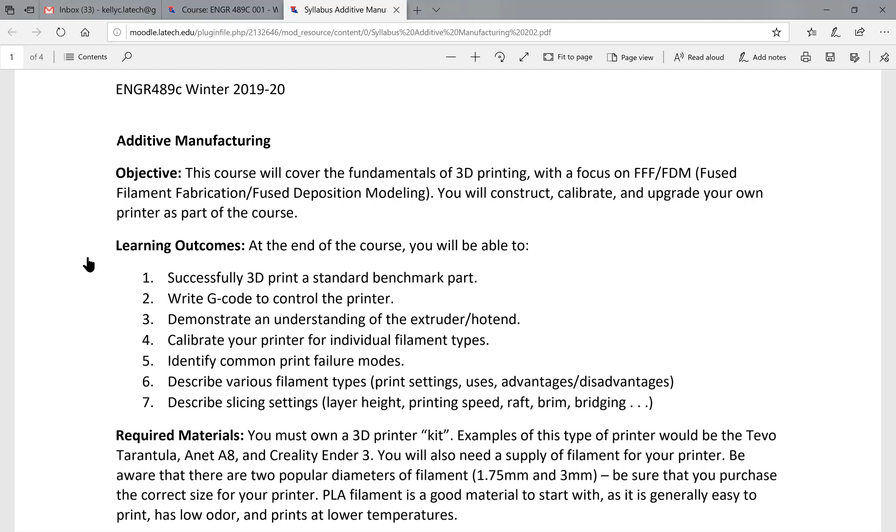And then at the end, there is either a second quiz, or you can just print 3 more things out of the option of stuff to do, and that can count as the last quiz.

You do need to have access to some kind of printer. You don't have to bring it to class. I'm going to bring mine, this one, or actually I'll leave this one here. I'm not going to tote it back and forth, but you can bring them to class if you want to.

There are cabinets over here that you can store them in for some amount of time, although a lot of them have locks on them, so I guess you can't use that. We'll use that very first one. You don't need to bring them, so unless you have a problem that we need to look at and try to fix, you don't need to bring them to class.

Most of the time, anything you print is going to take a minimum of 20 minutes and way on up from there. So most of the time, having you print something in class isn't going to be a really viable option. But there's a couple of days.

We'll do one day right before the Christmas break that is bring-your-printer-to-class-if-it-has-problems day, so we can make sure it's printing before you leave for wherever you go for Christmas break. But other than that, even then you don't have to bring it, it's just an option. I'll bring this one or keep this one here.

But you do need to have one, because most of the assignments, like 80% of them, require that you printed something. So you have to either have someone who will let you use their printer all the time, or have one of your own.

This one I have, the little Tarantula Pro, is a decent size one. It's not the smallest one you can get, it's certainly not the biggest one you can get, and it's not terribly expensive. There are plenty of these kits that are in the textbook price, the expensive engineering textbook price range, so you can certainly find one out there that will work fine. Actually, this one works pretty well. I've only printed with it once, though, so we'll see how it holds up.

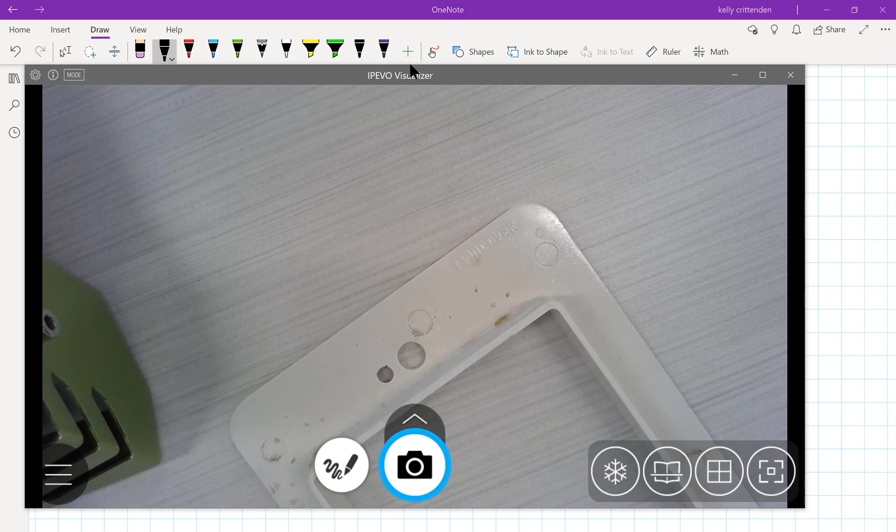That means this thing was injection molded. That's one sign it was injection molded: it's got these little ejector pin marks where the part was ejected from the mold it was in. A lot of things, particularly the cheaper plastic stuff, were made with injection molding. So a lot of stuff is injection molded.

Let's see, what else did I have on here? iPad keeps going off.

So we're talking about additive manufacturing. There's also subtractive manufacturing—milling and lathe operations and things like that, where you start with a block of stuff and cut off all the stuff you don't want. That's subtractive manufacturing, and there's a lot of different ways to do that.

Then there's forming. The really cheap plastic stuff, like a blister pack that an SD card came in, is vacuum formed—you take a sheet of plastic, heat it up, and suck it down over some form. You can also form metals: stamp metal, press metal, that kind of stuff. So there's forming in general.

Joining—you might weld stuff together. And casting, you've actually done some casting. If you've done 321, which I assume everybody has, you've done casting and subtractive in that class. And certainly you've joined things—you may not have welded something, but you've bolted or screwed something together.

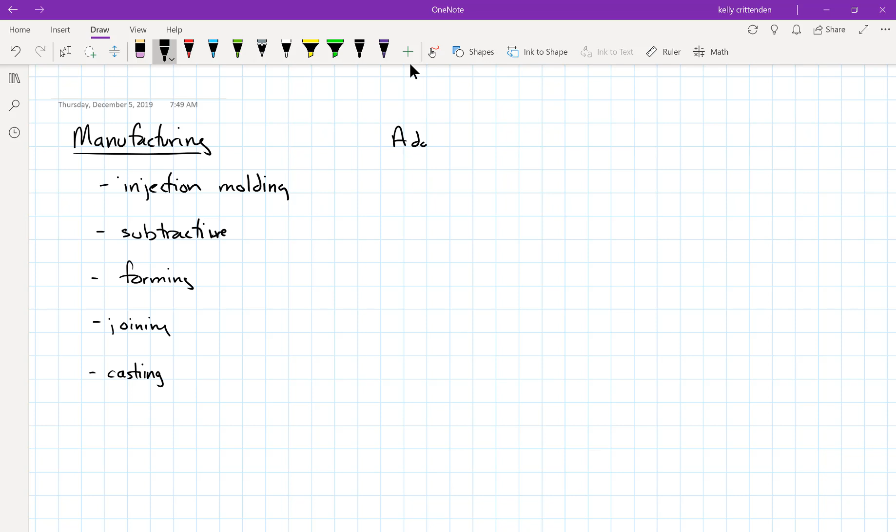You may not have done forming or injection molding, but you at least know what they are. So those are most of your traditional manufacturing processes. And then we're over here in this new thing. I say it's new, but it's actually probably older than you think.

The first 3D printers were around in the 80s. There were SLA machines with a vat of liquid resin, using a laser to cure it in selective spots—those were around in the 80s. And people have used this idea plenty; the pyramids are basically really giant versions of additive manufacturing, where you stack things on top of things. So it's not that it's very new.

What's new is that in the 80s, the companies that owned those patents patented everything, and it was never actually manufacturing—it's still not really manufacturing. Although there are places where it's getting closer to manufacturing, it's still mostly prototyping or really short-run type things.

So making hundreds of things maybe at the high end, whereas manufacturing is usually thousands or tens of thousands of things. It's not that you see these little 3D printers on an assembly line anywhere really yet, although there are some companies with models similar to that, where you have print farms that print parts for other printers or for the automotive industry.

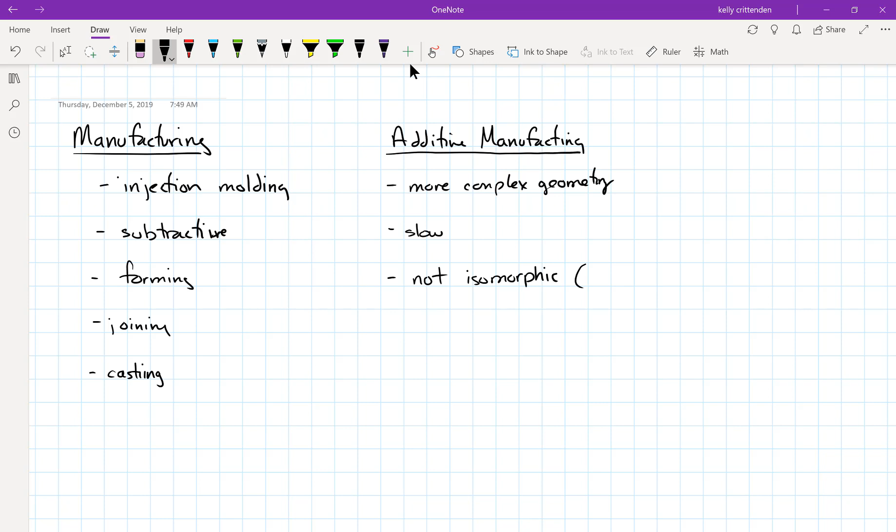Sometimes they are, not always isomorphic. Particularly with this style, the printers that we're going to use in this class are much stronger in one direction than another direction because of the way they're made. The resins, the ones that use lasers and UV light and that sort of thing, they're generally pretty isomorphic, so they're equally strong in all directions.

But some of the other processes, particularly the cheaper ones, are not. They have grain to them that makes them sort of like wood, where they're strong one way and not another. So we're kind of over here in this additive manufacturing arena.

We're not going to get into the manufacturing side of things, although you can relatively easily open up a little Etsy store and sell something, vases or whatever. We could probably go on Etsy right now and look for vases, and there's maybe 40 different ones to choose from, just 3D printed vases, because you can make really complex geometry. You can make interesting looking things that you couldn't normally make, and you can do it relatively quickly.

So a vase the size of this might take you 2 hours to print, maybe something like that. It's not terrible because it's not solid, it's just a bunch of walls. So you can make some money doing it, but most things right now are not manufactured using this.

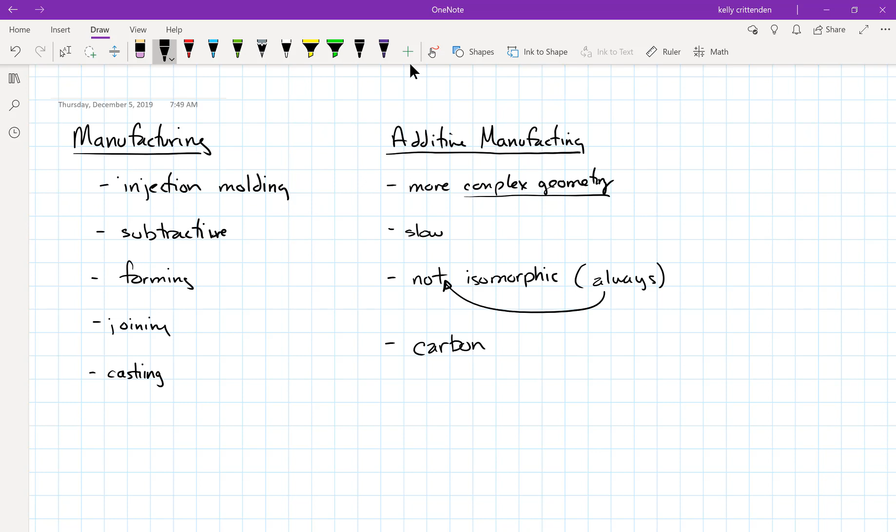So that's what's new about additive manufacturing, I don't know that these are called FDM printers. So let's talk about the general types of additive manufacturing, even though we're not really manufacturing things right now on a large scale.

There are ones that are based around some kind of liquid, like an SLA. These were the first printers that were commercially available, these SLA resin printers. You had this vat of polymer, and you shined a laser on the polymer in certain patterns, and it made prints. That technology hasn't really changed much at all, other than they've built different resins. There's much more blends of resins now, but it's still very similar to the way it used to be even in the 80s. And these can produce really highly detailed models.

I remember the first one I saw was in Memphis in '95 or so, at an orthopedics company. They had one of these just to make prototypes, like images of bones from CT scans. They could 3D print the bone and then build some kind of orthopedic device around it. They had printed this little tree, and it had all the leaves and branches and everything, and that was in the mid 90s.

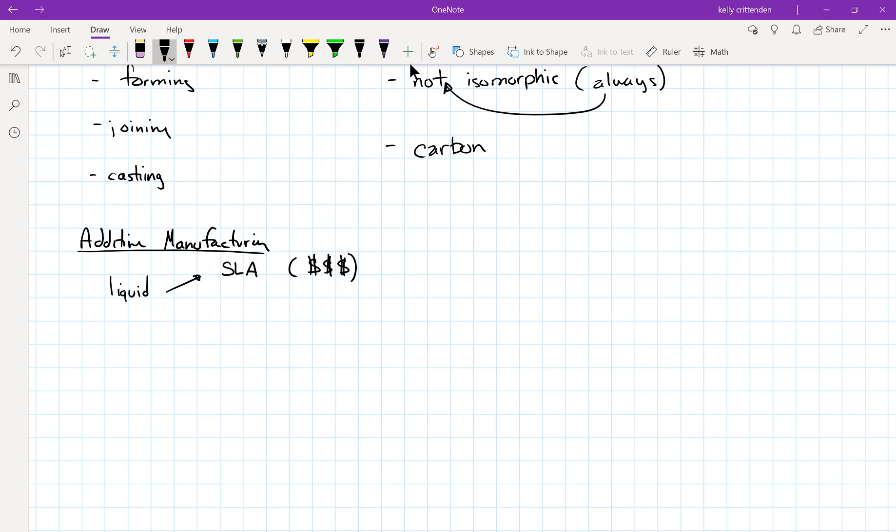But recently, people said, hey, resin doesn't just cure with lasers, you can also cure it with UV light. So they took basically cell phone screens, shined UV light through them, and used the cell phone screen as a mask, so you can make the screen whatever pattern you want. And they have these now that you can get for $300-400 that cure with UV light, so they're on the cheap side. This one up here is like $200K or so for a good one.

Now there's this in between that's in the 5,000 to 7,000 range that still uses a laser to cure resin, like the Objet printer, I think. There's one kind of in the middle called the Formlabs printer, they have different versions, Form 1 and 2 and all that kind of stuff. It's kind of in the, I don't know, maybe 6,000 range.

These little guys down here, maybe I'll just put a dollar sign on this one. A good one is like the Photon, and it's $400, I think, probably. You can probably find it for $400.

And all of them are able to print pretty high detail, so you might get layer heights in the 0.05 millimeter range or less. Really, the layers start to vanish at that point. This thing, a lot of times I'm printing at 0.2 millimeters or 0.3 millimeters if I want to go fast, and that looks decent.

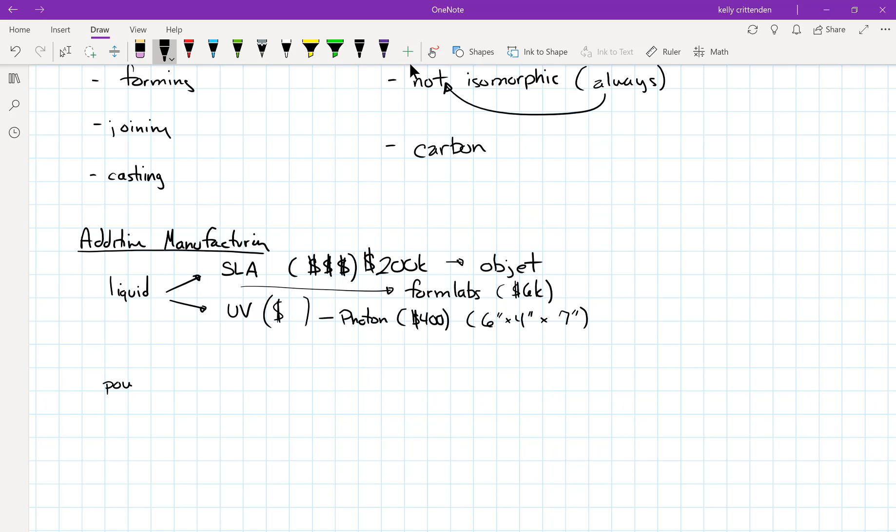You have another set that is based around some kind of powder, and these fall into a category called binder jet. The first one I saw of these used inkjet printer cartridges. You'd take an inkjet printer cartridge, and it would have 4 or maybe 5 cartridges - one was basically a glue, a binder that held the powder together, and the others were color. So you could actually print in full color, and they are able to print full color.

Basically, it had a layer of powder, and you bound part of it together in whatever color you wanted, then scraped a new layer on top. The machine did all this, you didn't do it. It built this up layer by layer, just like any of these others. Then when it was done, you dug it out of the powder and infused it with super glue, more or less - though there are other things you can infuse it with to make it flexible or whatever. The idea was that you temporarily glued it together with this binder on an inkjet printer type cartridge, and then finished it later.

They're kind of weak, these resin parts. This carbon printer here is one of these resin printers with a little bit of special technology to make it faster. The parts that do show up in additive manufacturing a lot of times are in that resin category. The powder ones are just prototypes - they're not really going to be usable parts. They're kind of fragile, better now than they used to be, but still fragile.

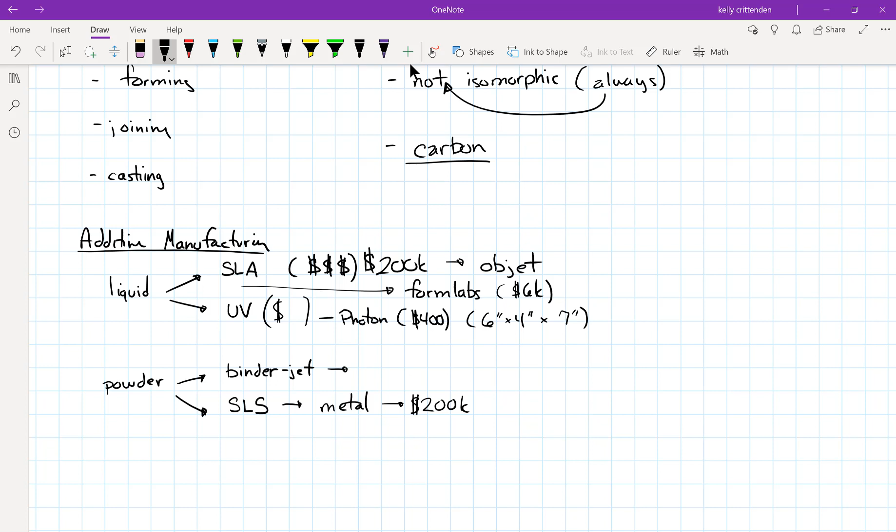What we're doing kind of revolves around plastic. So we're over here, and this is FDM, fused deposition modeling. The patents on these early FDM style printers from Stratasys, who owned most of them, ran out, but their trademarks didn't, and FDM is actually one of their trademarks.

So a lot of times you'll see people use FFF to mean this. Let me write it down - fused filament fabrication. It's the same thing, but FDM is trademarked, so sometimes people get in trouble for using FDM. That's why you'll see FFF instead.

These fall into all sorts of plastics. You can print in nylon, you can print in PLA, or this one - I don't know what this is, it says it prints like PLA. Oh, it's biofila. I don't know what that is, but it prints like PLA. ABS is the material like your car bumpers are made of. You can print in PETG, which is somewhere between PLA and ABS, but not as noxious smelling as ABS. There's also filament that is the base filament with stuff embedded in it.

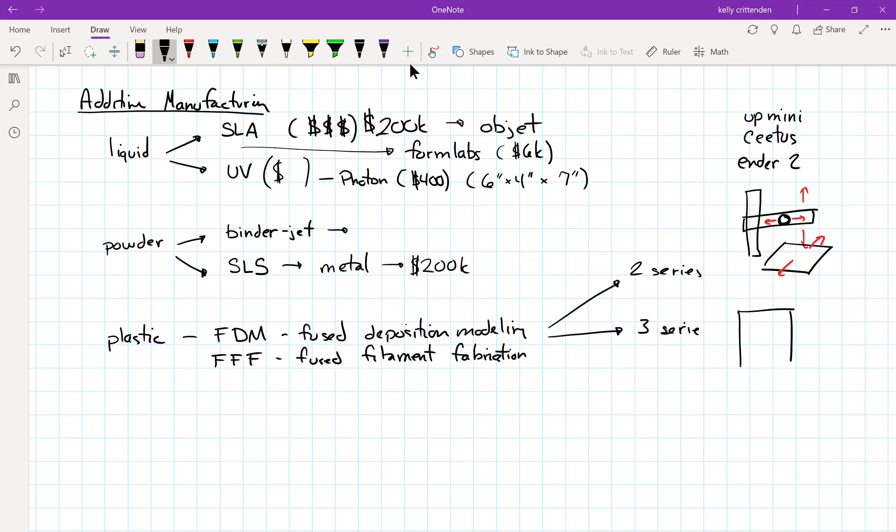And then in the 3 series, you've got like this Tevo here, where you've got 2 upright pieces, so you've got a whole gantry. Maybe they're connected at the top — most of the time they are, though there might be some really cheap printers that aren't connected across the top. But you have this gantry, and you've got your axis across here with the hot end on it, and the axis can move up and down, and the hot end can move across, and then you've got the bed again that moves frontwards and backwards.

All these where the bed moves have the disadvantage that the bed is relatively heavy, and if you want to print quickly, you've got to deal with the fact that this bed has inertia and you have to move it back and forth really quickly. So it limits how fast you can print a lot of times because of the massiveness of the bed, having to accelerate and decelerate and change directions back and forth all the time. The print head itself is not as heavy, but it can also suffer from that.

And there are things you can do about that. One thing is, a printer like this one would be the Tevo, Ender 3, Creality CR10 — however you spell that, CR10 — those are that type of printer. Some people said, well, let's not move the bed, and so they built what we're going to call these Core XY. Ender actually calls it the Ender 5, I think.

And what they did is they built a box, so you have 4 uprights, and the bed is in here, but instead of moving up and back and forth, the bed moves up and down. So when you're moving up and down, you don't have to move very quickly because you're only moving maybe 0.2 millimeters, 0.1 millimeter, something like that. So it's moving pretty slowly, and it's just one step at a time, more or less, so you don't have that inertia.

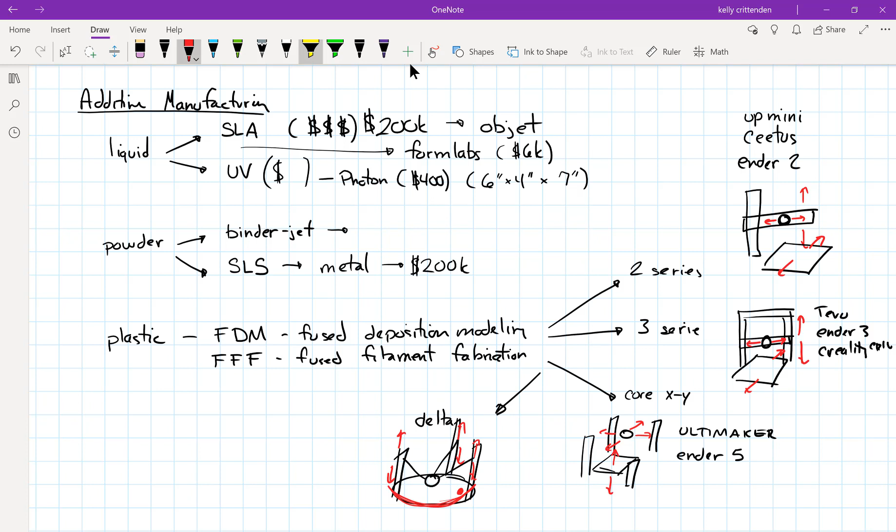Most of you are going to have one of these guys—that's probably what you're going to deal with. The Ender 5, you might have that. It's relatively affordable. The Ultimaker is kind of expensive, $2,000 or whatever. But all the Deltas, you can get a little Delta printer. I would not get a Delta printer for this class unless that's just what you already have.

Just because some of the stuff that we would like to do isn't as obvious how to do it on the Delta printer. So unless you already have that, I wouldn't get one of those for the class, although they're kind of fun to print with. You might have one of these little Ender 2 style printers. They're not necessarily much cheaper than the 3 series printers—they might be a little bit cheaper. They're smaller though, so if you don't have a lot of space, then they're kind of nice for that.

And then there's all these other things—some really weird stuff out there. Like there was a printer that basically took a roll of paper and cut out every layer. It would cut out one layer, then cut out another layer, and put these little index holes in them, and you glued all these layers together—or more recently the printer itself glued them all together. It would be full color, everything, but your part would just be like stacks of paper glued together.

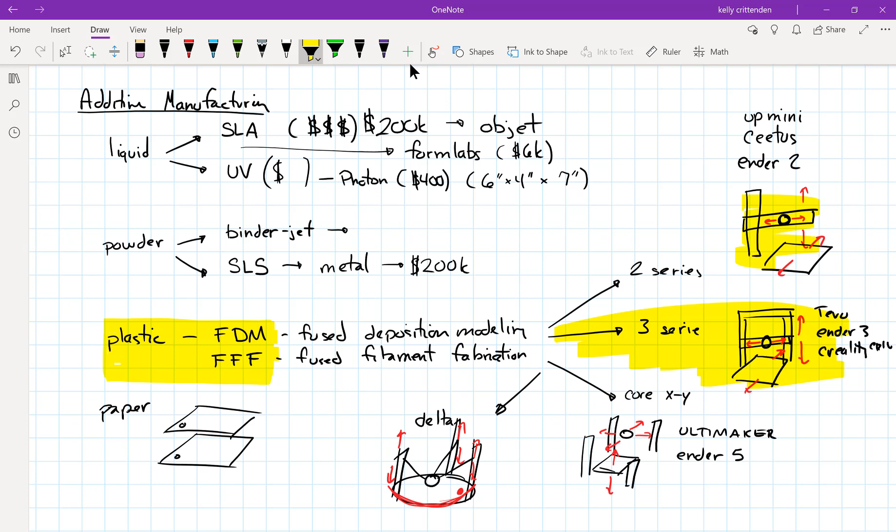So when you're looking at your printer—let's see, yeah, I think maybe we'll try to print something. I haven't printed with this printer in a while, so we may not be successful. We'll see.

You generally have like 4 pieces of it that matter, and then everything else is either an upgrade or a better version of the thing, or you added on something to make something simpler. But you got to have some surface.

When you see them with this foil on the bottom, a little thicker, what that generally means is this is a heated surface. PLA, you don't have to have a heated bed to print, but other materials, you might have to have one of these heated beds. So some of your printers, like this Cetus, it does not by default come with a heated bed, it's an optional thing. So if your printer does not have a heated bed, you're going to be limited on the materials you can print. But one of the materials you can print is PLA, which is the one I recommend you print anyway. So you have to have some kind of bed.

Sometimes the beds you get, like this one's a relatively thick piece of aluminum. I haven't actually tested it to see how flat it is, but they might not be flat, and that makes it a little bit difficult to print. One thing you can do is just go to Walmart and get a little mirror and put it on top. The mirror is pretty flat, or just a piece of glass, doesn't even have to be a mirror. The mirror is nice if you have a heated bed, because the backside is coated with silver of some kind, so it conducts heat better. But it doesn't have to be a mirror. It can be a piece of glass whether or not you have a heated bed. It's fine, but that is generally flat and will kind of level out whatever unevenness there is.

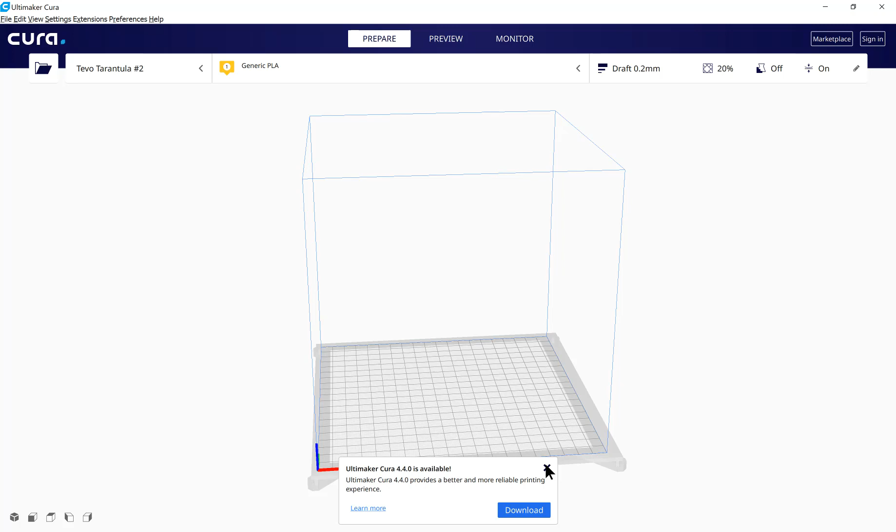So if this was the first time I did this, it wouldn't know what printer I want to set this up for. Some printers are bigger and smaller, and they use different systems of moving around. So the very first time, you do have to set up a printer.

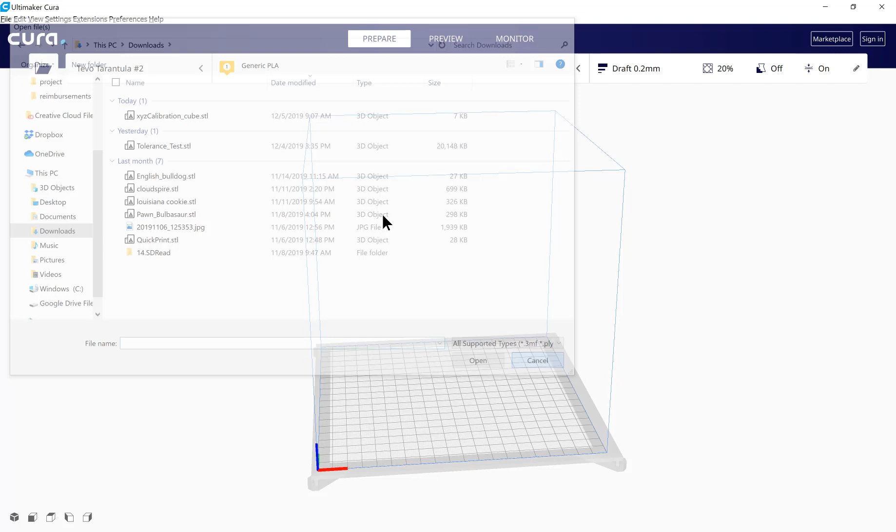So if I were doing that, let's see. Oh no, that's if I want to load something, I don't want to do that, that's to load a file. I think right here, you wouldn't have anything named, maybe it starts out with Ultimaker. They keep changing these menus where everything's at. This is the 4.3 version. Apparently you'll download the 4.4 version, which probably looks similar.

You go up here and add a printer, and they have, oh wow, that's all cluttered up. You probably aren't going to have a networked printer, so you don't need that. You probably want to add a non-networked printer. Then they have a list of all these different printer types. There's all the Ultimakers, and then you can make anything you want in here.

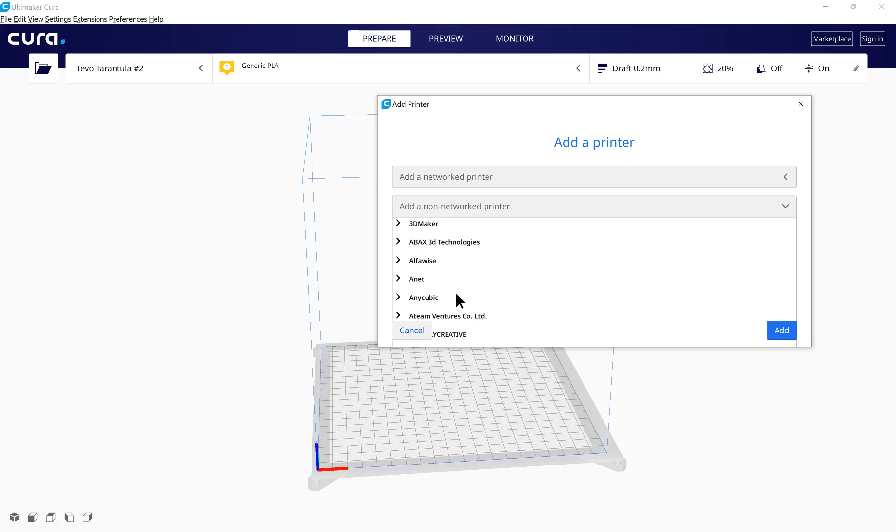And then there's a lot of the different manufacturers. ANET is one of the ones you might have, it's one of the cheaper printers. Let's see, Creality, so all your Ender stuff is probably in there. Yeah, there they went. So all the Enders are in that Creality set of printers, and the CR10 and all that kind of stuff. Tevo's, usually they're in here too. Let's see.

There's a lot of different ones. MakerBot's in here, I doubt any of you have a MakerBot. Monoprice, that's the little one, I think. The Up Mini is the one that, or I guess it's the Select Mini.

Select Mini, okay. Prusa, those are good. I have a Tevo, I can probably type in and search, but I'm just looking through them. SeeMeCNC, those, they produce some of the good Delta printers that I've seen. Tevo, all right, so the Black Widow, that's a really big one. Tarantula is the one that's here, and the Tornado is kind of the medium-sized one. So I would pick Tarantula.

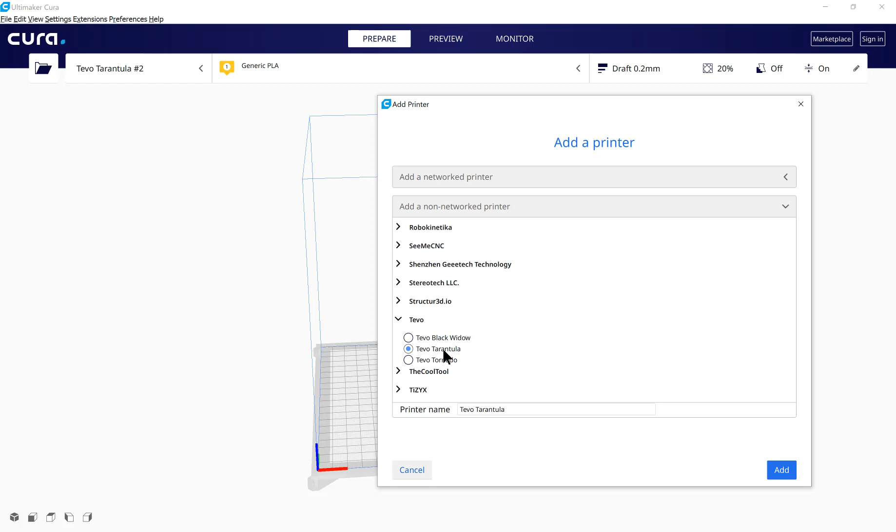What that does is it basically goes in - I've already done it so I don't need to add another one - it adds in the option here that I've got, actually I've got two for some reason. I put in that I want to use whichever one I want to use, and it sets the build volume. So I've got this little view of what size I've got to work with, and this outline of how tall I can make it. Your part has to fit inside that build volume. It'll set things like different extruders need different factors to extrude the right amount of filament, and it'll set all the stuff that it knows to kind of generic, this should work out of the box type settings. And then you go and tune it from there.

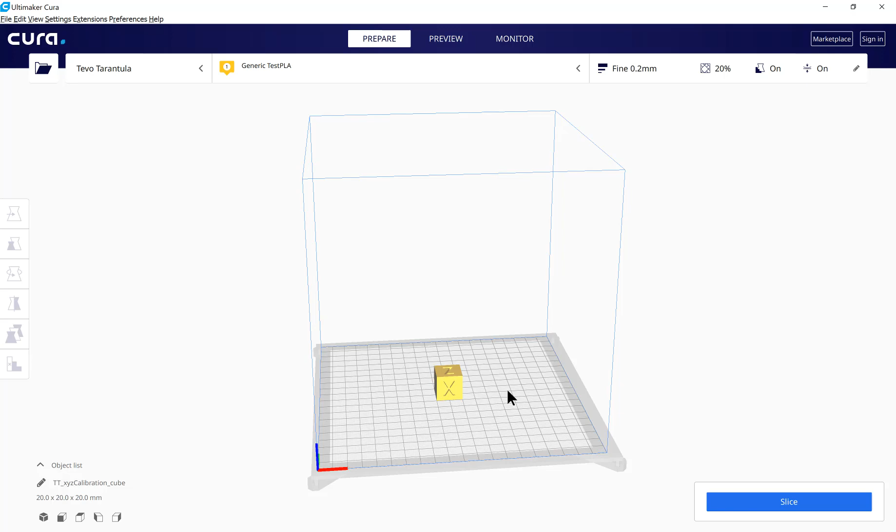We need to get our calibration cube. There it is right there. So we'll open that, and it sits in here. Oh, I can't zoom. Okay. Let me see if this mouse will connect. Yeah, all right. So, there we go.

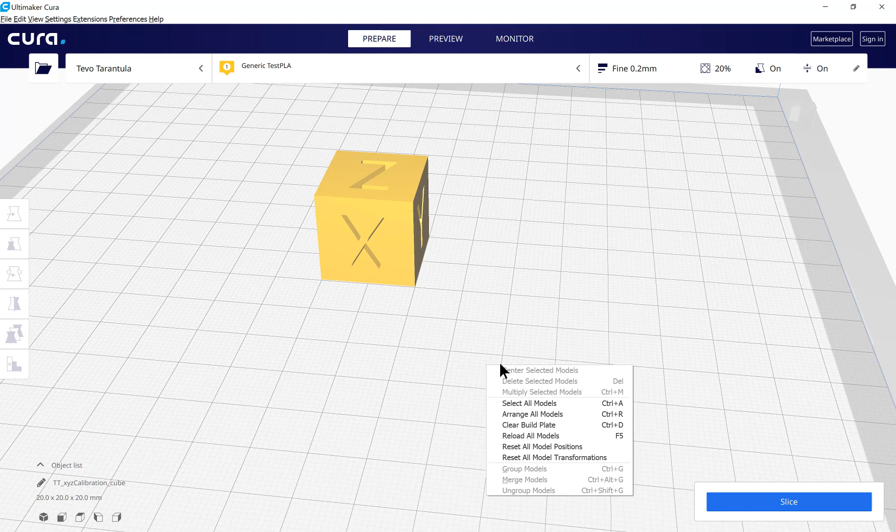So it puts an X, a Y, and a Z on the thing, and those are the axes. Y was printed in the Y direction, and Z was printed in the Z direction. So it kind of lets you orient it, because what you're looking for is to see if the dimensions are correct, but this will help you reorient it if one of them is not correct. It'll show you where you might have a loose belt or something like that, or if there's some features, sometimes there'll be little bumps behind some of these letters, it'll let you know that maybe you were printing too fast in that direction, something like that. So anyway, I get the geometry.

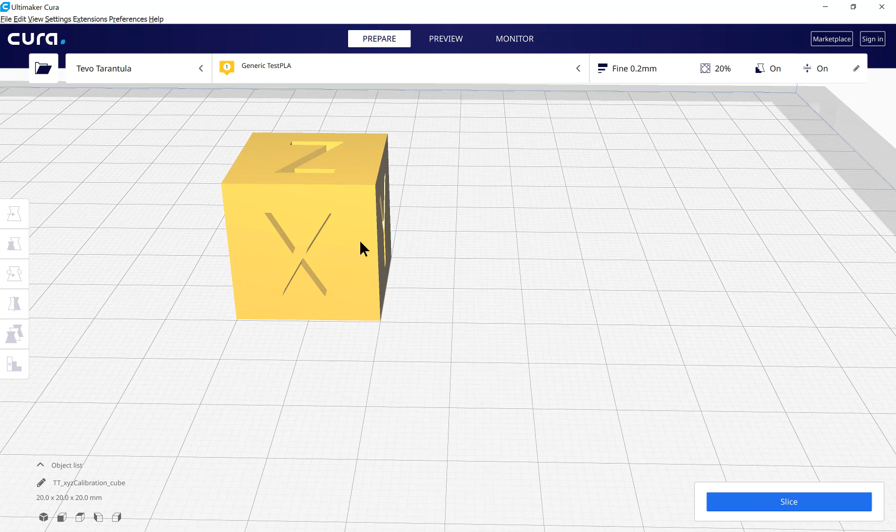This is the STL file, and then I have to set up how I want this to print. Cura, by default, has this really simplified set of settings here, where do I want fine? I don't want fine, I want draft. We'll throw that away. Now, actually, it put draft at 0.2.

So this layer height, there's a whole bunch of stuff, pages and pages and embedded links and drop downs and all this kind of stuff that you can go through and tweak every last little detail. For now, you kind of want to look at this one, layer height, so that's the one they put up here at the top. The layer height is how thick each layer is going to be, and the thicker you make them, then the fewer layers you have to print, so they'll generally print faster.

And there is a limit. So most all of your printers, the nozzle, the little end in here, the hole in the hot end that the filament comes out of, is 0.4 millimeters. So by default, most of yours are going to squirt out filament that's 0.4 millimeters in diameter. In general, you cannot print layers that are more than 75% of that size. So 0.3 millimeters is about as thick of a layer as I can print with a 0.4 millimeter nozzle. I could probably go a little higher, but it's tough, you have to trick it into doing anything more than that.

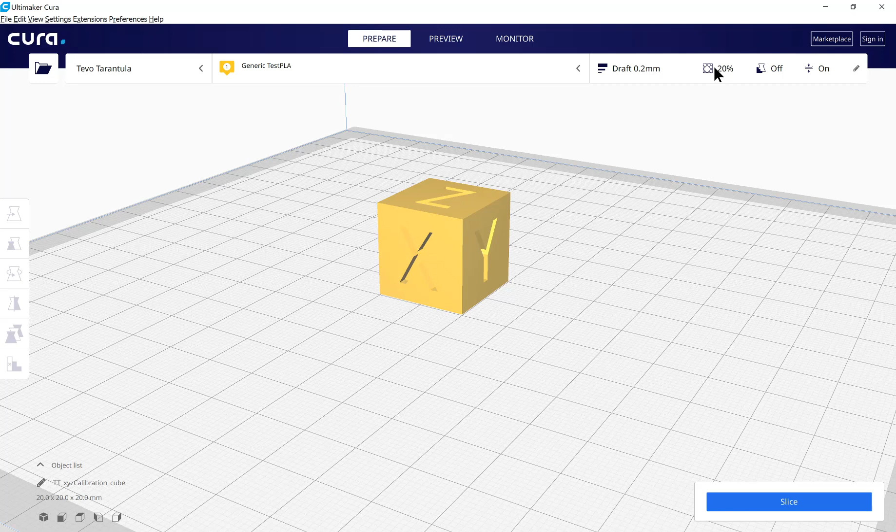This one is talking about how solid do you want it to be. You can print these things with just a shell or some amount of interior, all the way up to solid. 20% is probably a little higher than I want. I'm going to print this at 10%. And then there are other patterns and everything, but I don't worry about that.

This one is support material. One of the advantages of additive manufacturing is the complex geometry, but sometimes you still need to support that geometry. Like if I want to print this phone up in the middle of the air, I can't just start there. I have to have something to hold it up and then print on top of that. So those are supports.

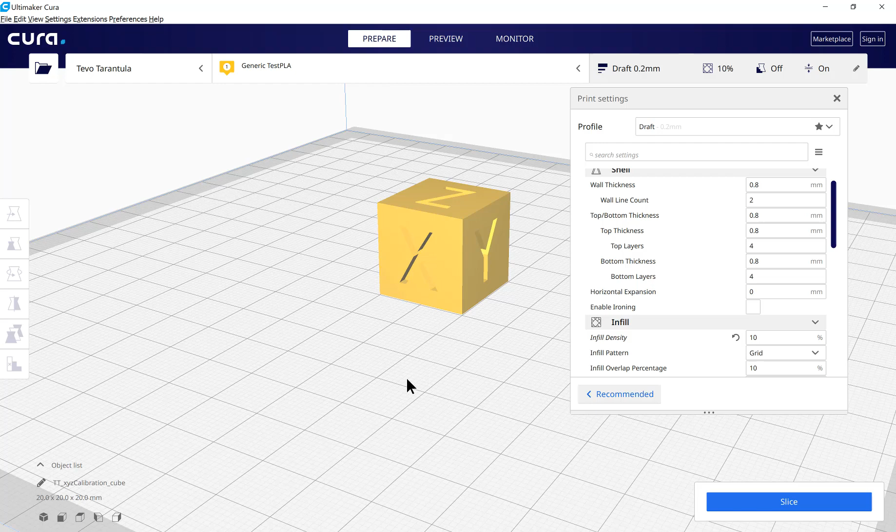I don't need supports for this one. I'm going to print it straight on the surface, and there's nothing that's really overhanging. There kind of is though. If we look really close, like the top of that Y and the X, those are just hanging out in space.

What they're doing is, it even shows them as red. All the red surfaces are overhangs. I don't know if I can make it rotate. There we go, so it's showing that those are unsupported.

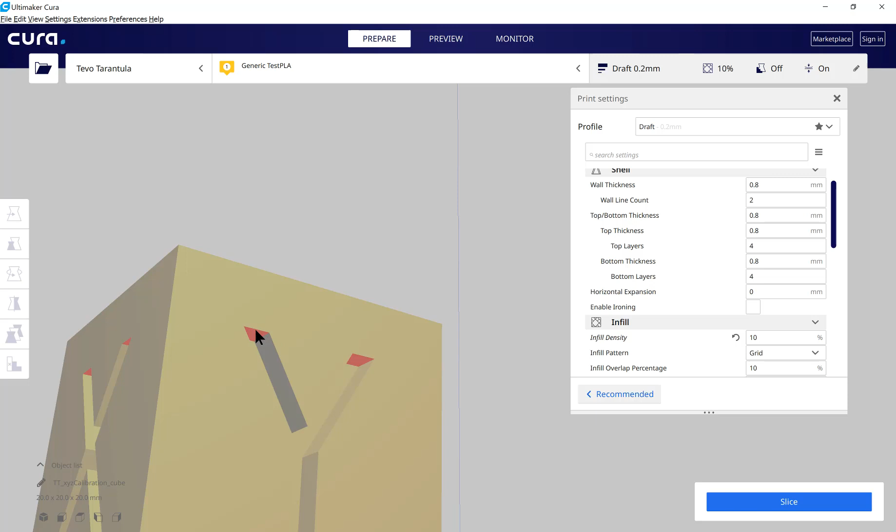But what it's going to do is print over here, and then it's going to bridge across to over here. That's such a tiny little gap that it'll be okay. You can bridge a couple of centimeters probably on most printers without too much trouble, so that's certainly not going to be a problem. So I'm going to leave support off.

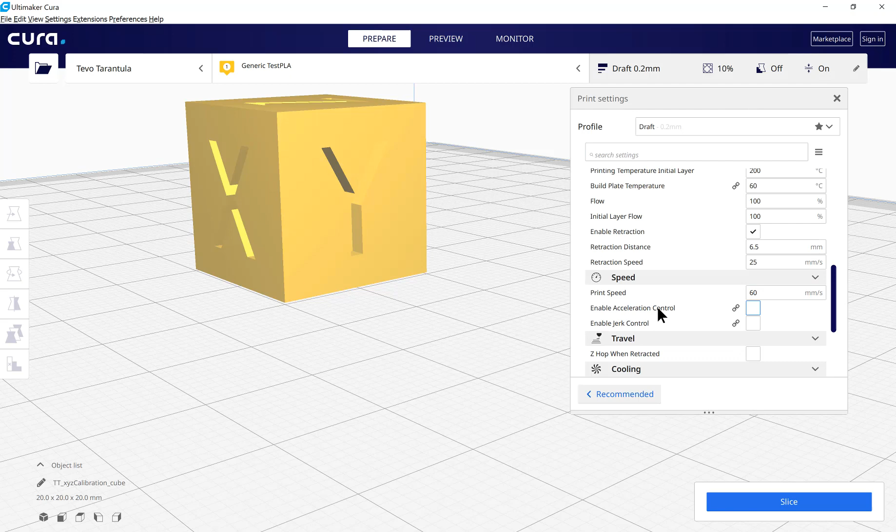This last one is bed adhesion, and it is on. What I've got it set to is probably a brim, so I actually don't want a brim, I want a skirt. There are 4 generic types here. Skirt is going to print basically some outlines just to purge the nozzle and make sure that it's printing.

I usually use that to make sure it's going to work. So I usually use skirt. If I think it's not going to stick very well, it doesn't have a lot of surface area, I'll add a brim to it.

I think I've got these right, we'll check and see. The brim actually attaches to the part, and it basically makes the bottom layer bigger, and you cut off the excess later, but it'll let it stick better. If your print surface is really wavy and everything, you might just print on a raft. What it does is it spends the first time extruding this really heavy material to create a flat surface for you to print on, and then you print on top of that thing.

Or you can just do none. This would probably be fine with none, but I'm going to use skirt, I think that's the one I want. We'll slice it. So then I've got all these set the way I want them. There are many, many more options that we'll talk about later.

This one is printing though, and you slice it. This one doesn't take very long, it says it's going to take 17 minutes to print. It's going to take 3 grams of filament, which I've certainly got here. Or if I want to measure it in length, 1.13 meters.

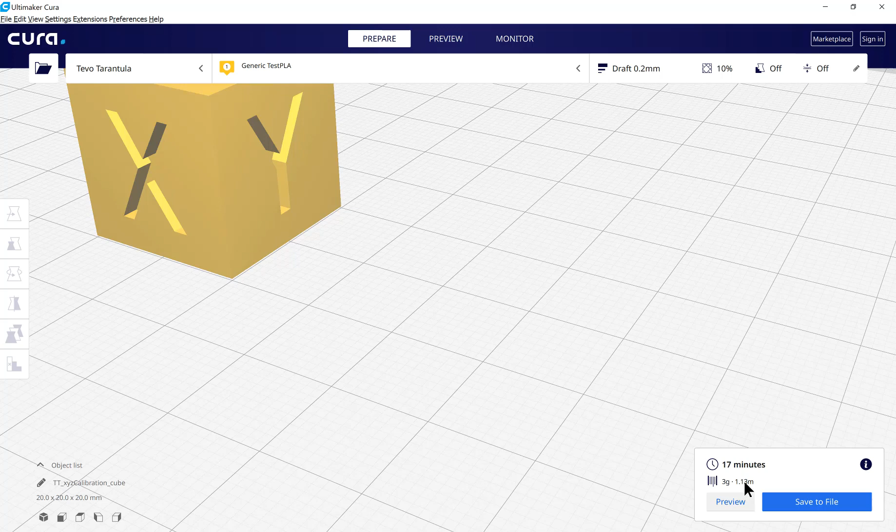I want to preview it though. All right, so yeah, this is the skirt. See these 3 lines that are out away from everything? That's the skirt, and I'm just using that to make sure it's printing in the right spot, make sure it's going to stick, and that it cleans the nozzle out, it purges it. Actually, I may have problems with that.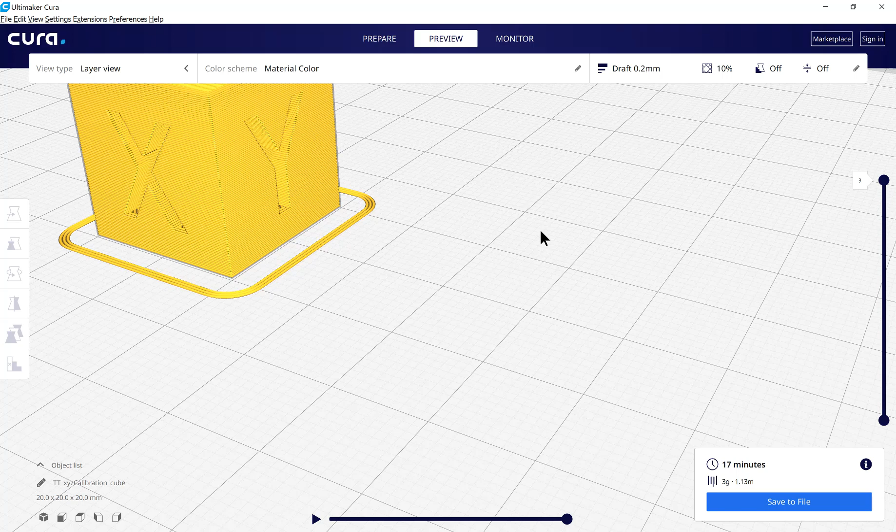I need to heat this, we'll come back to that. You normally want to go through and run through this little slider. See how it's hollow on the inside? Let's see if I can get it. That is the infill, so it's not solid in there.

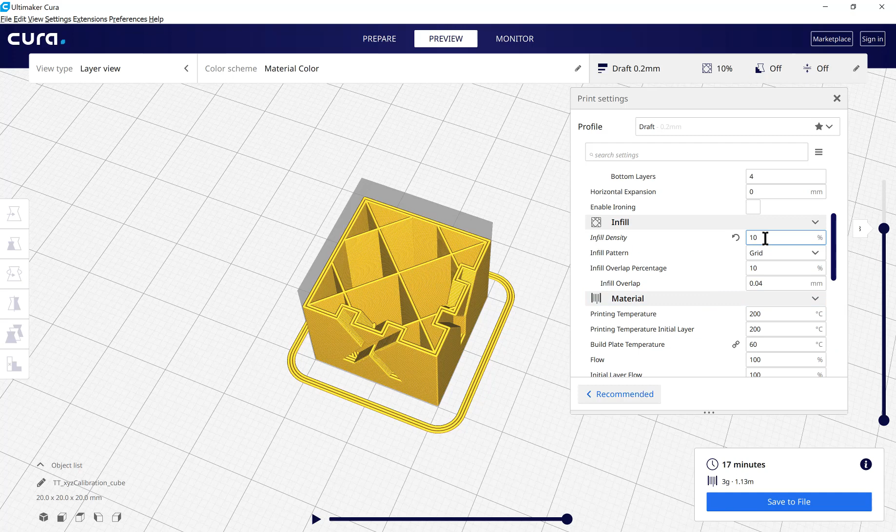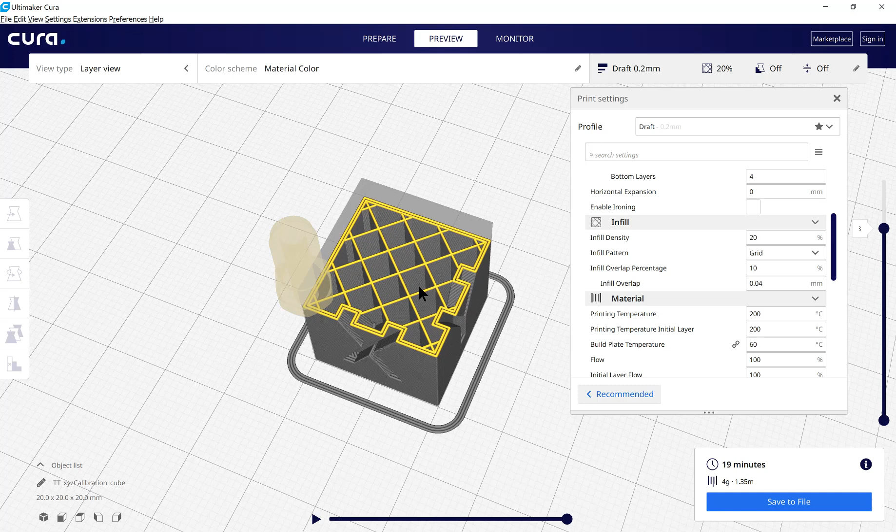If I went and made it more solid, so where's it at? Infill, so it was at 10 before. Reslice it, now see it's got more stuff inside there. So you do have to have some amount of infill for most things. If you want to put a top on them anyway, it is possible to bridge all the way across with no infill at all, but normally you want some amount of infill. 15% might be a good number, we'll do that.

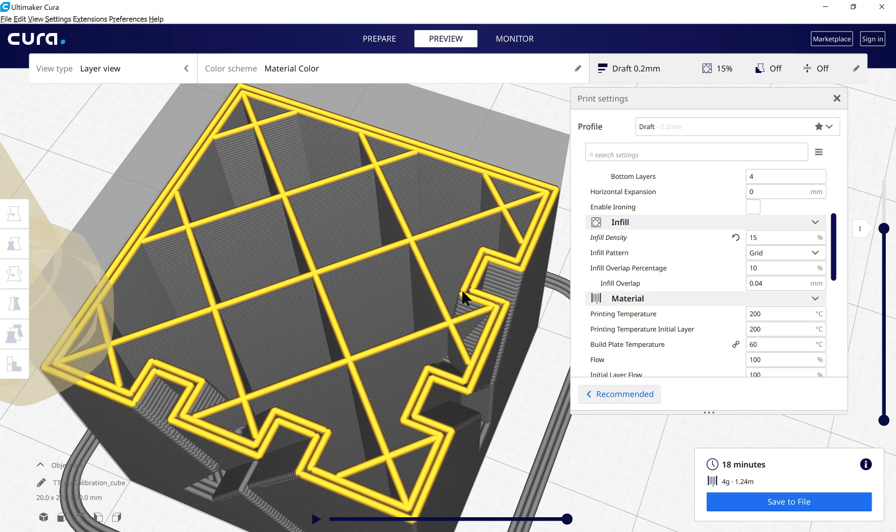There are some times when you can print with no infill at all, though. Notice there's 2 walls, so it's going to print 2 outer walls. That's probably as few as you want. You can print with 1 wall, but it's going to be very flimsy. If it's a structural thing, you probably want 3 walls in there.

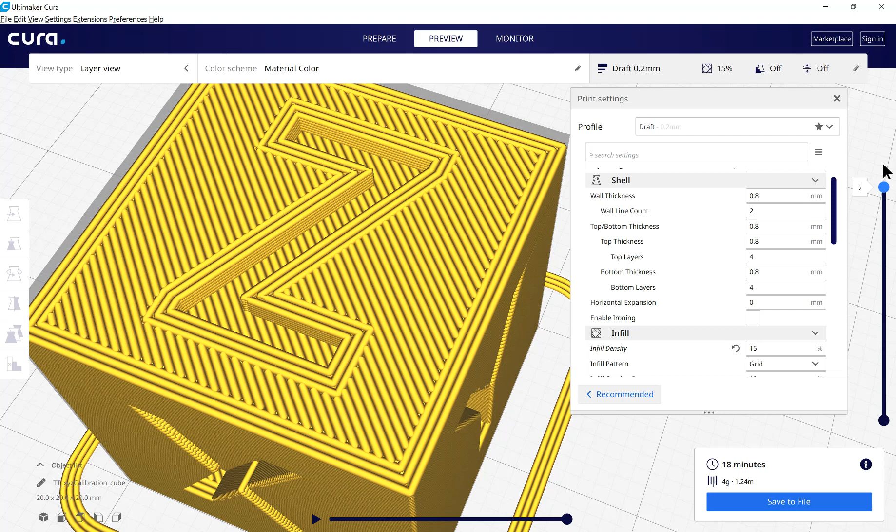Let's see how many top and bottom layers it has. So there's 1, 2, 3, 4 bottom layers. So there should be 4 bottom layers. Top layers, there should be 4 of those if we went all the way to the top. I wonder if I can go down with arrow keys. Yeah, 2, 3, 4 top layers of solid printed stuff. Those are all options you can change.

All right, so I've got my file. I need to save it on here, so we'll get this thing in here. Most of these do run, like I said, on SD cards, so you do need a way to get the file from your computer to the SD card. Fortunately, my computer has an SD card slot.

I don't know, most of them use the regular size SD, but there are a few that I've seen with the micro SD on there. All right, so we're just going to save it here. Save to removable drive. It's going to be called TT, so Cura adds the initials of the printer. So this is Tevo Tarantula, and then the file name. We're going to eject that thing. All right, safe to remove it.

Then let's see. Let's go over here.

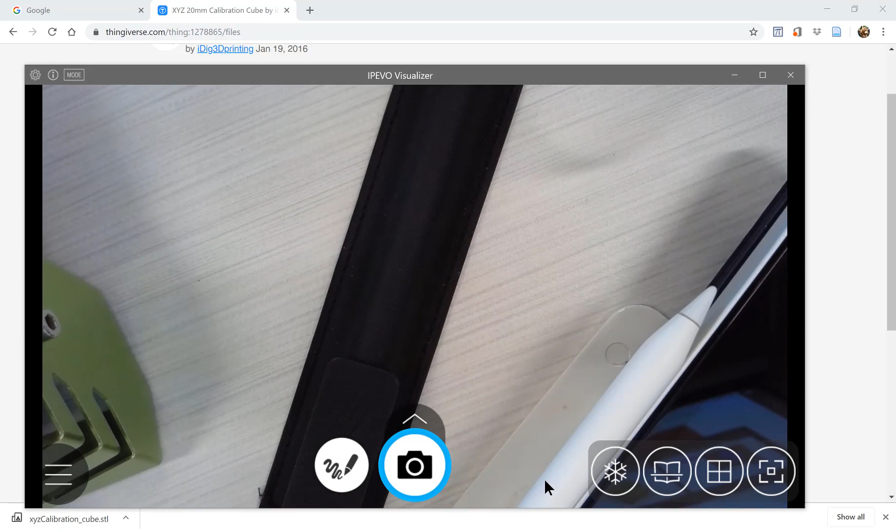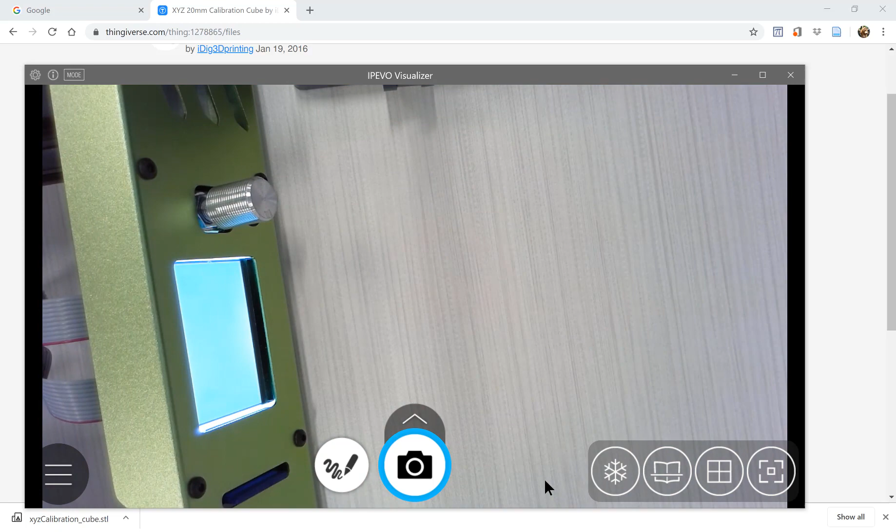So on this one, I don't know if this rotates very well. But there, got a little screen and the SD card in. Can I make it do? Oh yeah, maybe it's readable. Is it upside down though? It is. There we go. All right.

So most all of them interface with some little screen like this, where you've got a screen. Some are touch screen. Most of them have a little knob. This one has a little stop button down here. So it says card inserted. That's good. Sometimes they don't catch that the card is inserted right away. You have to do it a couple of times to get the thing to read that there's a card in there. You push the button.

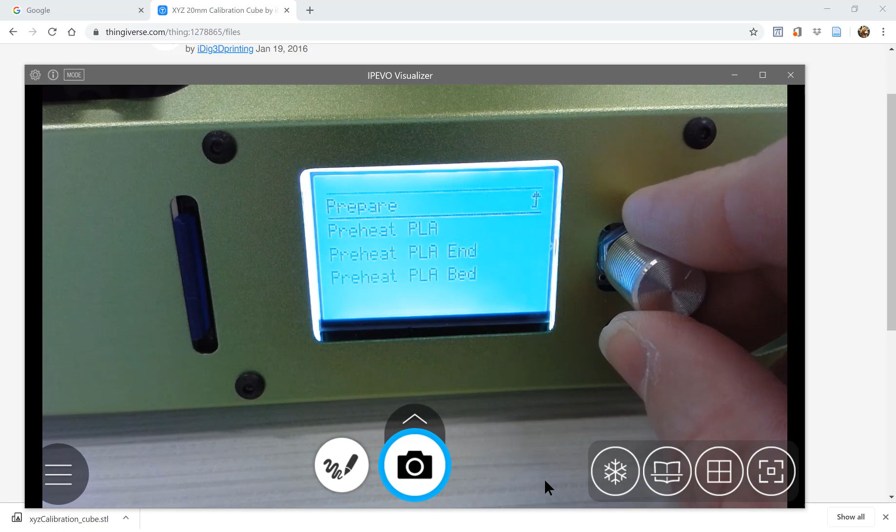You might want to go ahead and prepare this beforehand so you can preheat for PLA. You can heat just the hot end, or just the bed, or both. I'm going to do both because I've got some red filament that's kind of hanging out of here. I got to get it out of there, so we'll have to remove that.

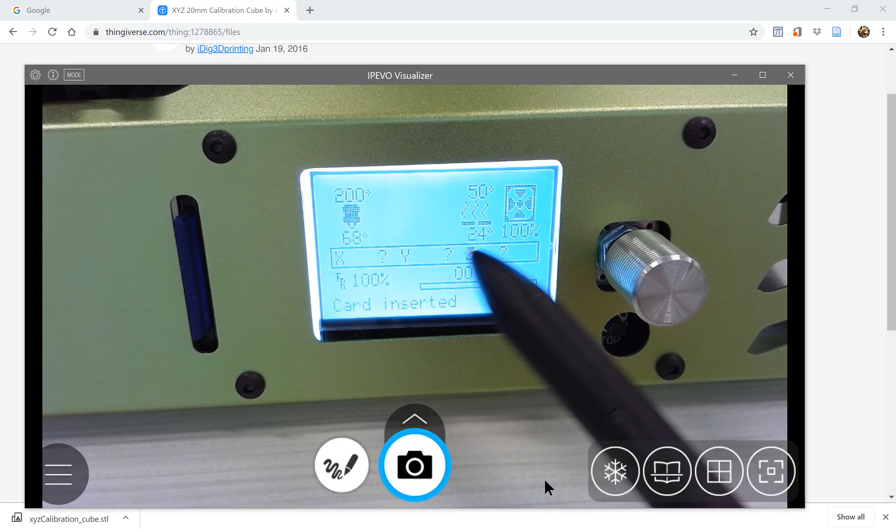So it's showing me. Oh, whoa. It's showing me the hot end set point temperature of 200 degrees Celsius, and where it's currently at. The heated bed is wanting to go to 50, and it's currently at 24. So it's kind of heating both at the same time. Some printers will do one and then the other. Some will do both at the same time. This one's doing both at the same time.

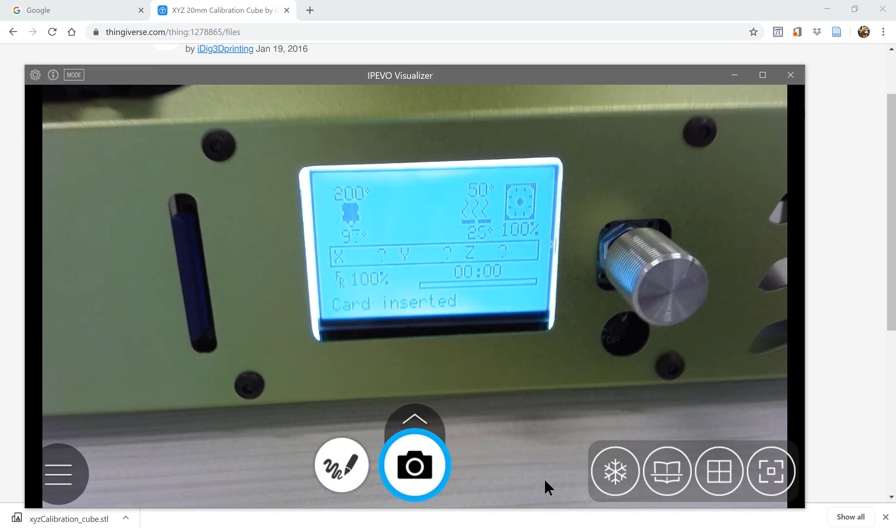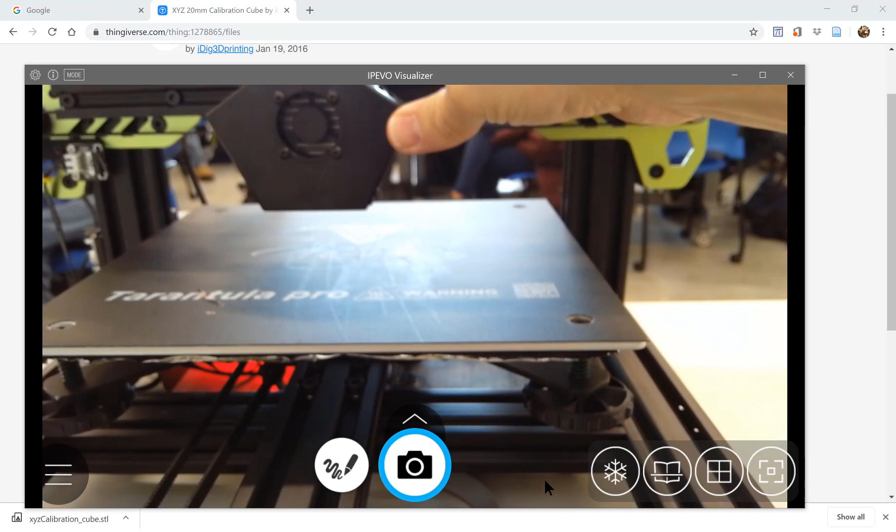This is showing this fan. So this 100% fan, that is this fan. This fan has to be running if your hot end is heated up. Oh, mine's going to make an annoying sound. I have to fix that. All right, well, we'll just have to deal with that for now.

This fan is the one that cools the cool side of the hot end. So you only want the very bottom down here hot. This part you actually need to stay cool, otherwise you melt the filament way up here and you can't push more in there. So the filament should only be melted down in the bottom, and you'll see that when you do the SolidWorks thing.

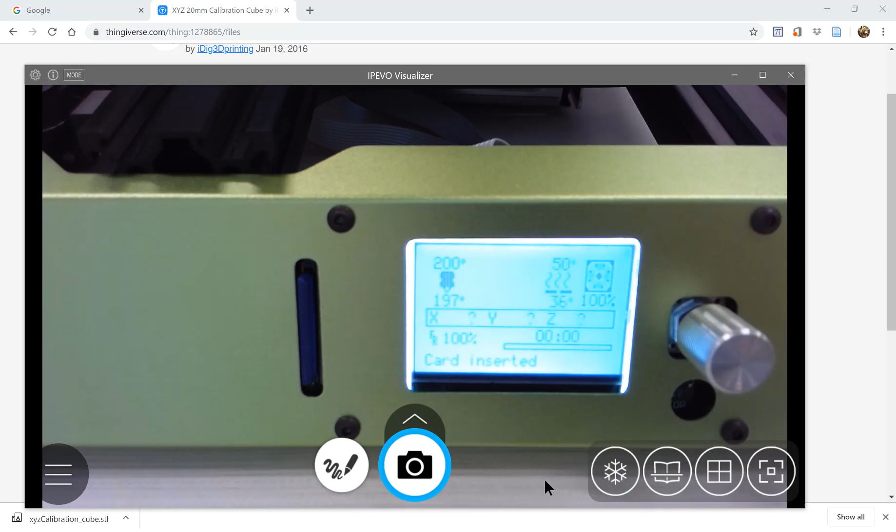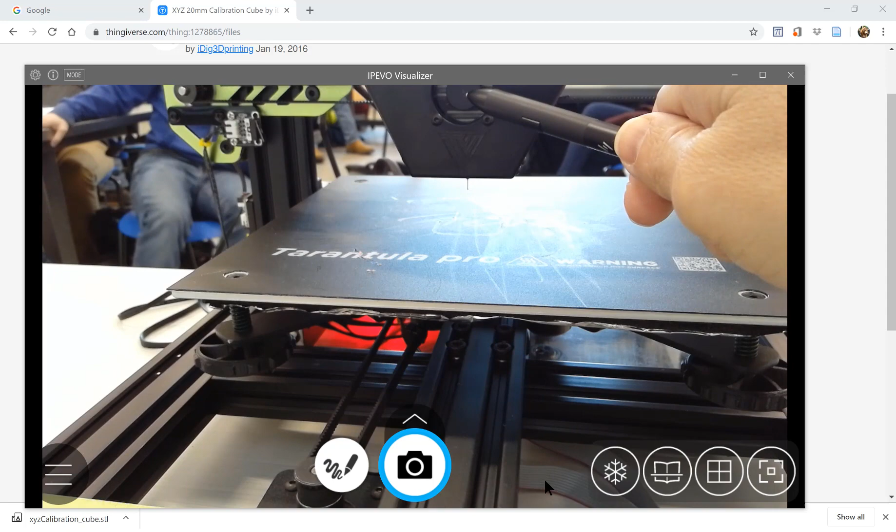On this one is actually, yeah, that may be the layer fans. Yes, this one is layer fans. I don't know why they're on right now, but I guess it just defaults to them coming on. This one, well, can't see that. This one should always be on. As long as this is on, this should be on. It won't turn on when you turn the printer on, but this fan should be on when you're printing all the time. These, wherever they might be, may or may not be on.

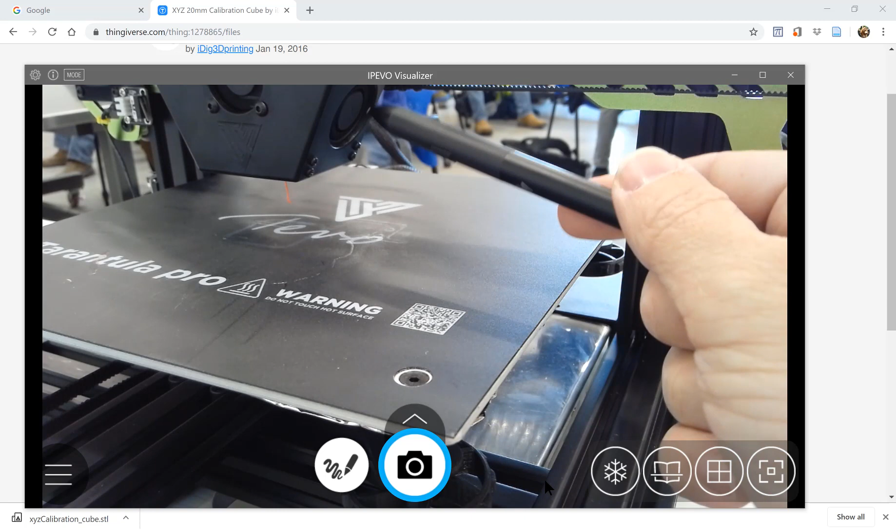When you're printing PLA, they'll probably be off for the first 2 layers, or maybe just the first layer. But once you get more layers printed, these, wherever they're at, they're going to be on different spots on your printer. They do need to be on for PLA.

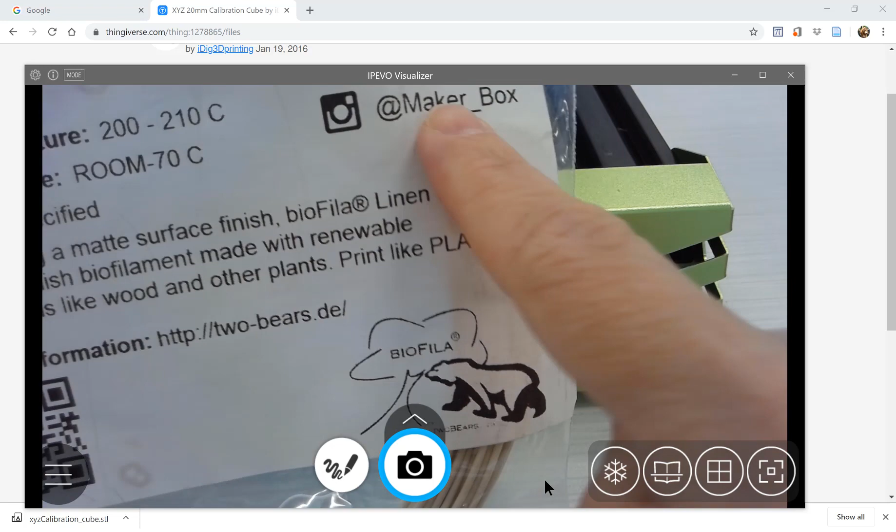We'll talk more about the individual different materials later. This is... actually no, it's this stuff. This is a little thing called a Maker Box. They don't send it, but I buy samples of filament just to try different stuff. So we're going to print this one called linen.

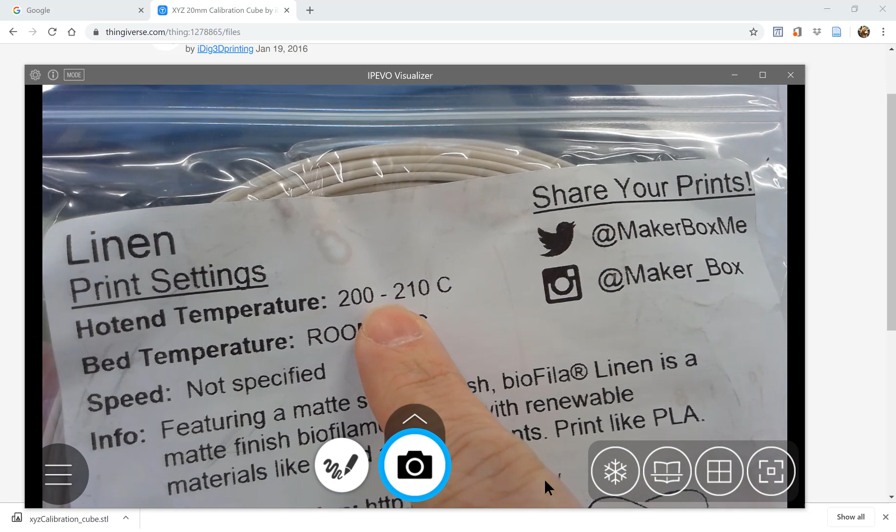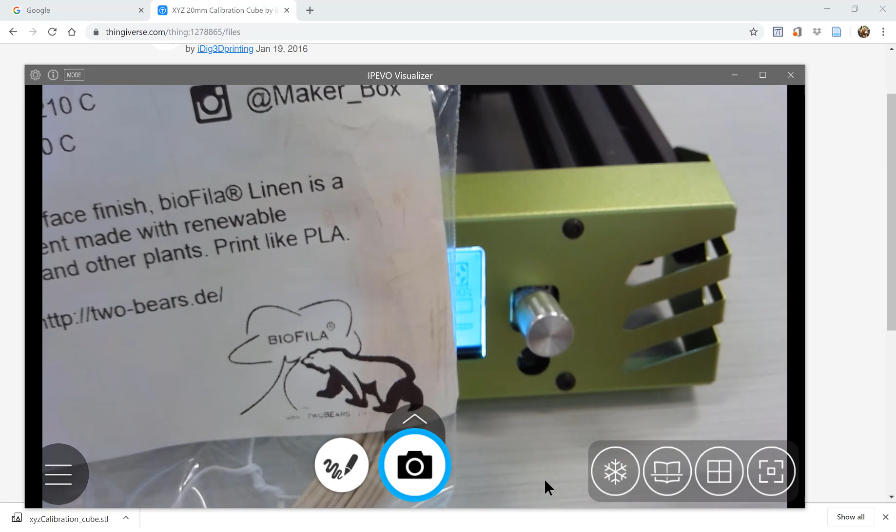It says hot end temperature is 200 to 210. I didn't actually check that on our printer settings. That's one of the things you can change in the slicer. But it says print like PLA, so I'm going to go with PLA. We can change it on our dial here if it's printing too cold.

All right, so now we got to get this old stuff out. Oh wow, this one's going to be fun. There it goes. Oh, not going to be fun at all. Sometimes when you leave filament in a printer, it... this one's disintegrating as we go. Maybe we can get it to all come out of here. I don't know, we may just have to run that through it, and that might cause problems.

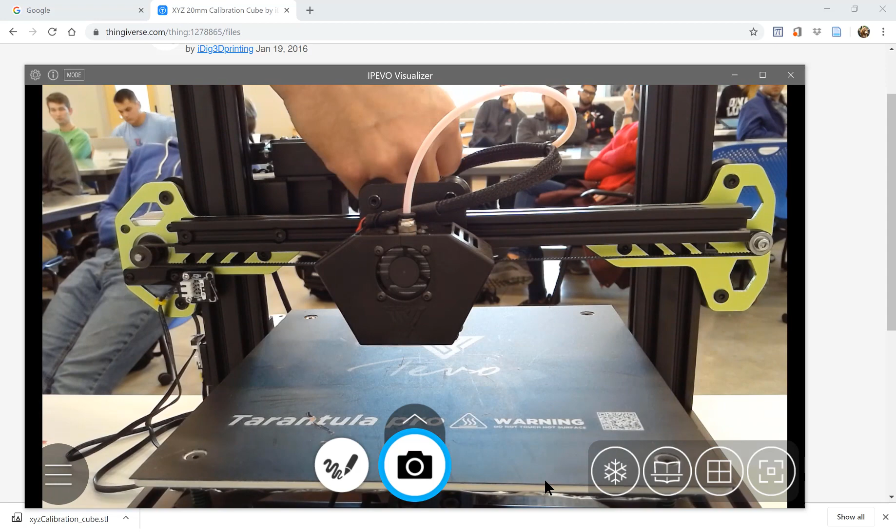It's kind of... we'll shove it through there. We'll do that, hope that works. So we might get a partly red and partly whatever color this is, linen print. Or we may get no print at all. We'll see.

All right, so normally these come on a spool. This does not, because it's just a little sample. It's generally not great to print not on a spool because it stands a chance of tangling up a good bit, but I think we'll be okay with this one.

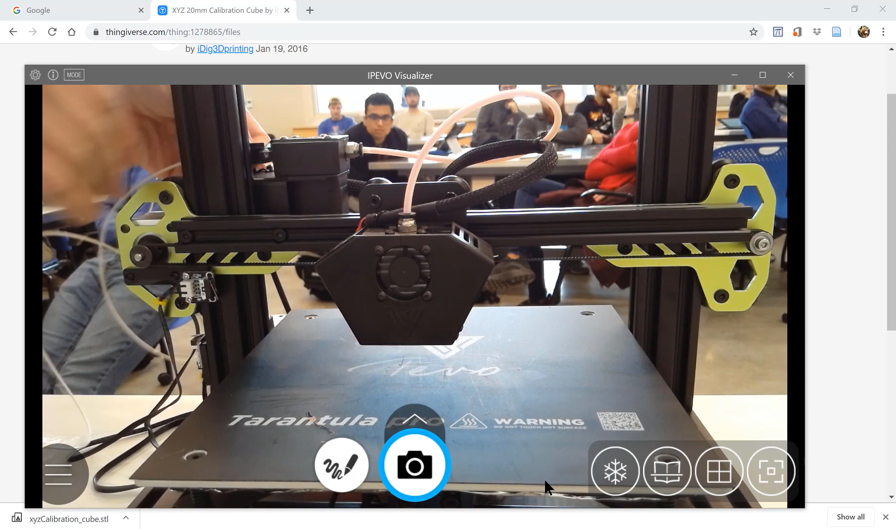Grabbing it, there it goes. All right, so we're just going to feed in some of this and see if it will. You're looking down here, you want this to purge. Yeah, so it's hot enough to spit that red plastic out. Sort of, not too fast though, it couldn't keep up with that. So there is a limit on how fast you can actually extrude filament because it does have to melt right in here.

I want to see if I can get most of that red out, though, because it was kind of brittle. If you have filament that's brittle, then it's probably going to be tough to print. And this was pretty brittle. Now, there are some filaments that are just brittle to begin with, like the copper fill that has copper built into it, it's super brittle. Some of the wood filaments are kind of brittle too. There are filaments that have a base plastic like PLA, but then they have sawdust in them, and they print wood. It actually smells like a campfire when you're printing with them.

I'll point this out: all of those materials that are really cool and have stuff in them, if you have this regular old brass nozzle that your printer came with, you won't be able to print for very long. Maybe not even that whole roll of filament, because they're very abrasive, particularly the metal ones, or carbon fiber or stuff like that. They're very abrasive to that nozzle, and it will wear it out to where it'll still print, but it won't be 0.4 millimeters anymore. It'll be oval shaped and bigger or whatever.

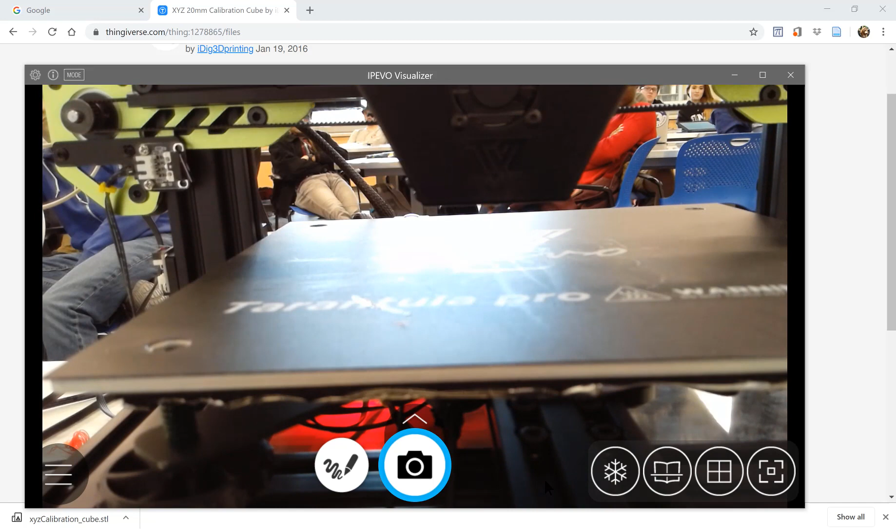Yes, be careful, that is very, very hot. And the bed is hot, but it's not crazy hot. Again, I'm touching it, so it's probably not going to stick very well. All right.

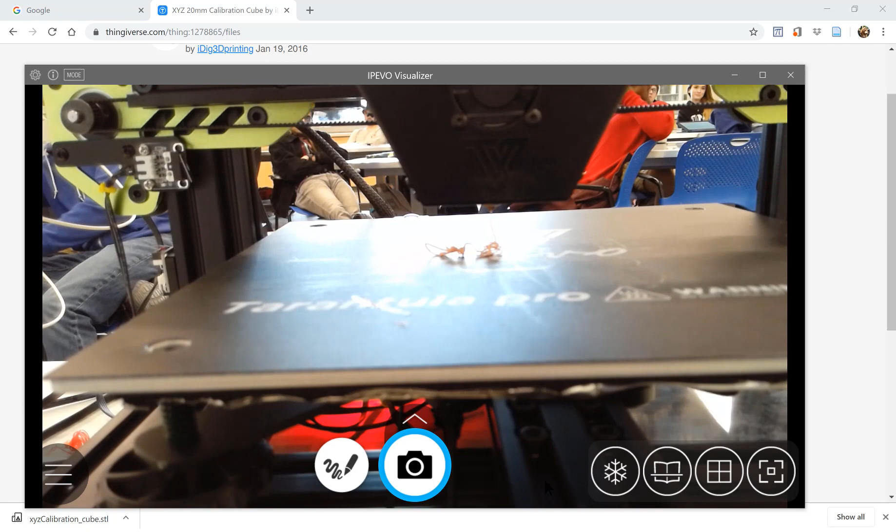Since this, I went from a red to a whitish color. For whatever reason, it takes a long time to get all of the remnants of the red out of the nozzle, like it gets buried in there. So it looks like we're close enough now. I don't actually care what color this ends up, so it'll be fine.

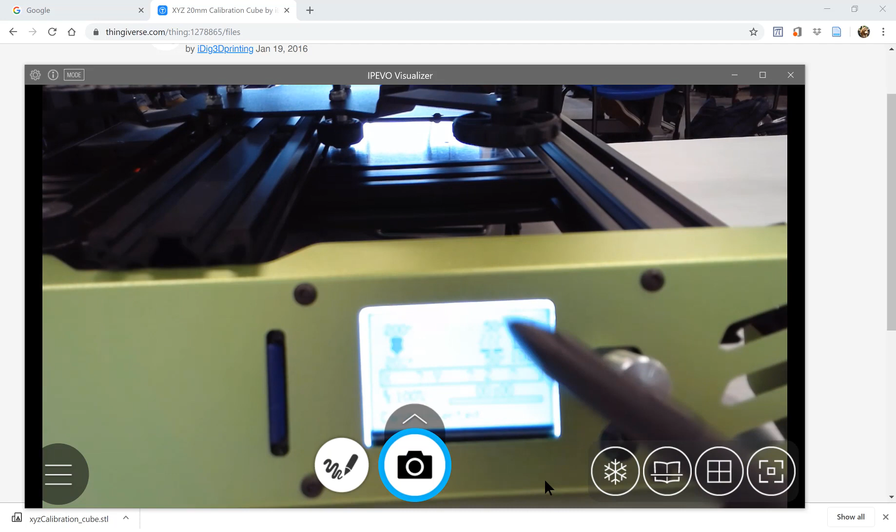All right, so now we're heated up to 250, or 200 on the nozzle, 50 on the bed. Card is inserted. Oh, is there a way to focus that better? Here we go. Now we want to print from SD.

So if you had your USB cable plugged into the printer, you could print straight from there, but I don't, so I'm going to do that. I've got all kinds of stuff on here. I'm looking for this one, the Tarantula XYZ Calibration Cube.

All right, and then the settings actually called for the bed to be at 60. It was at 50, so it's telling me it's going to heat up some more on the bed because it wasn't as hot as I told it to be apparently in Cura. So it's going to spend a little bit of time heating up.

I do want to check one thing. Oh, wow, all right. So this printer, I have not—and I guess this will be one of the first things that we add because I like it.

There is a setting that you can enable in your firmware to let you control the height of the bed in live printing, so you can actually move the bed up and down as it's printing. It's called baby stepping, most of the time, is what it's called in the firmware. I don't have it turned on here unless it's going to let me do that after it starts printing.

We'll try again. If that's not the case, a lot of times what you have to do—we didn't level the bed or anything, we just started it up printing. You would definitely want to go the first time and at least move the print head to each of the four corners, have it heated up.

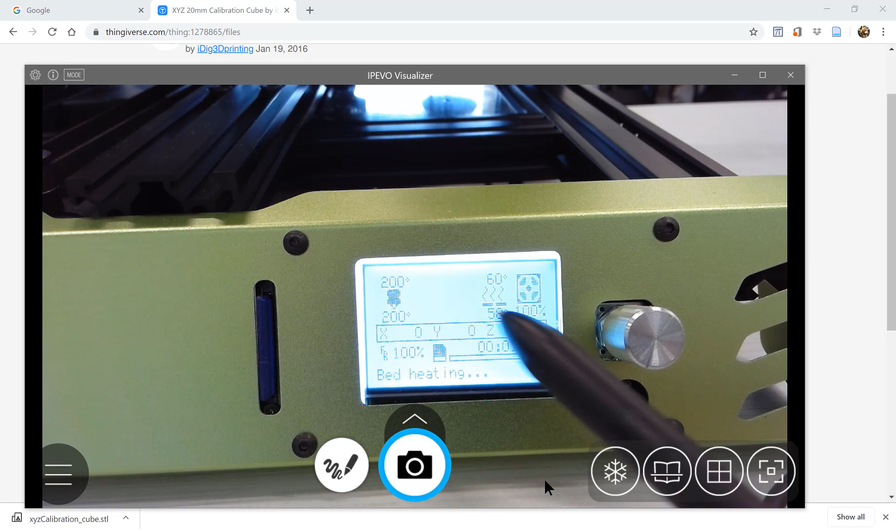But it's still going. It's at 58. Once it gets satisfied that it's at the right set points here, it'll take over and it should go in and home. We could have tried that beforehand.

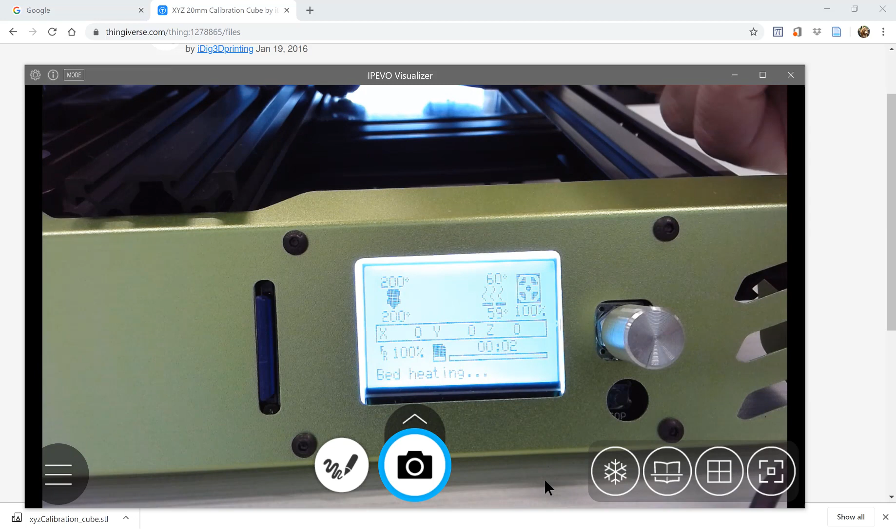So it doesn't currently know, I can move this all around. So it doesn't really know where it's at. So it needs to figure that out. So there's...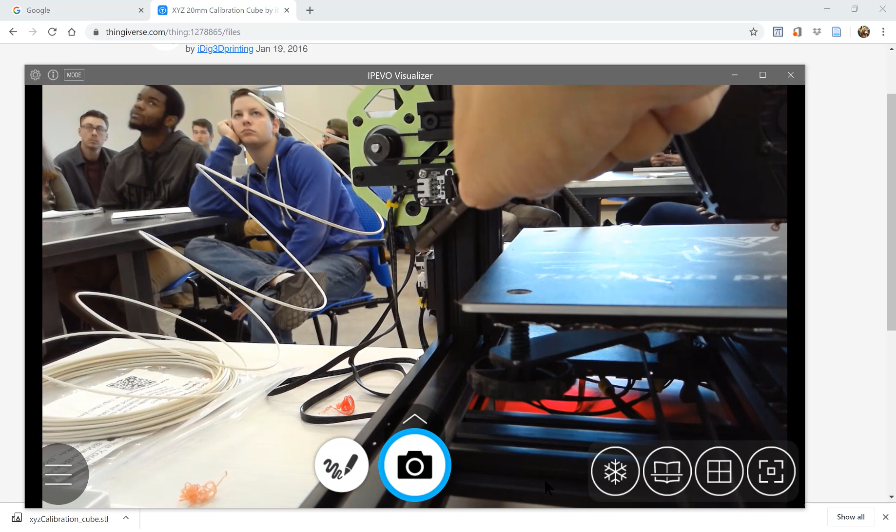Little limit switches over here, and there's one there. There's one at the back. So it'll go and find all those limit switches, and then it'll know basically where this front corner is.

All right, so everything's up to temperature. There it goes. All right, so here it's finding home. Now it's finding that home. Now it'll find the Z.

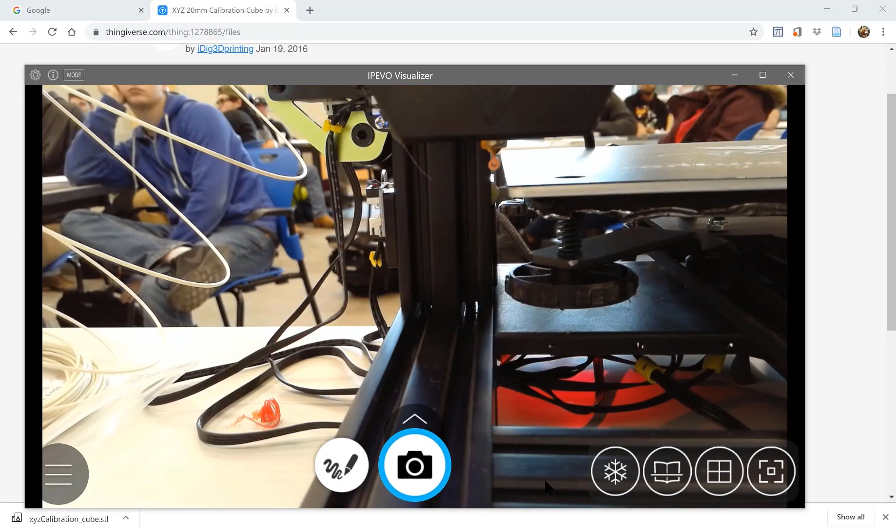Now what we're looking at is we don't want it to—it looks like it's going to be too high. So the only way I can—oh wait, I want to—yeah, I can't tune it there. Oh, I can. All right, so baby step Z.

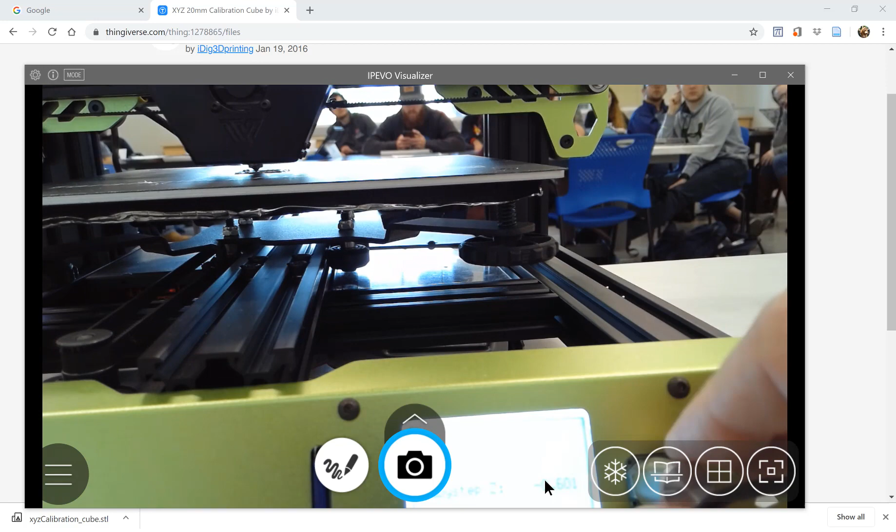So it needs to go down though. So our first layers are too high, but I can lower it down to something more reasonable. So we'll have a bad couple of layers.

That's also another reason. Let's see if I can get it to kind of look in there. I don't know, I'm trying to see it. It's very junky in there because those first few layers are bad.

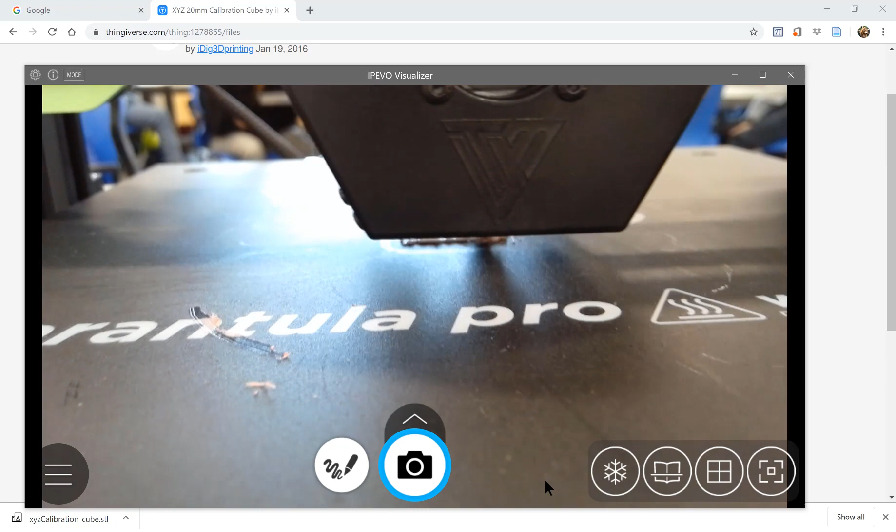It may have trouble focusing with it moving back and forth. But the more of those skirt layers that you make, the more time you have to get it correct by adjusting the height as it's printing. We didn't have a whole lot of time, and I didn't even know I could do it, so now it'll print for a while.

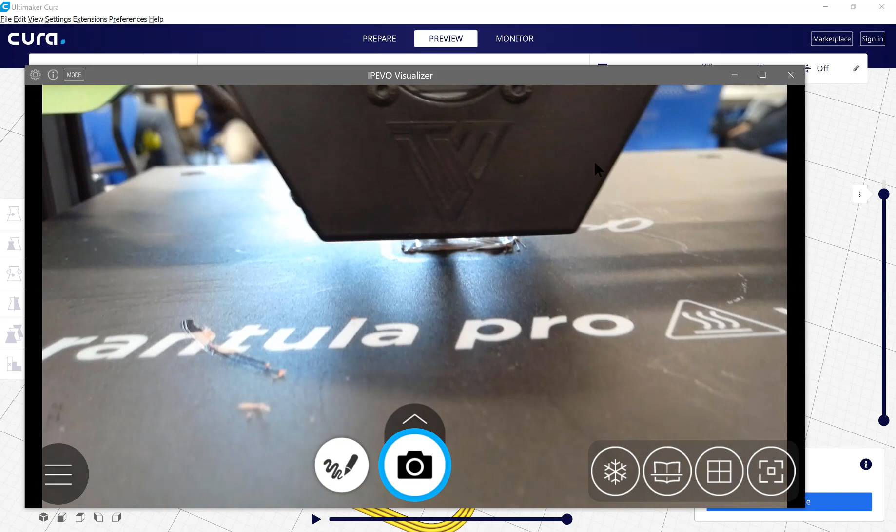On the baby step, what this does is it lets me set, I move the z-axis down negative by 0.626 millimeters. I had to drop it down a little over half a millimeter to get it closer to the bed because I could tell it was too high. It was printing almost in the air.

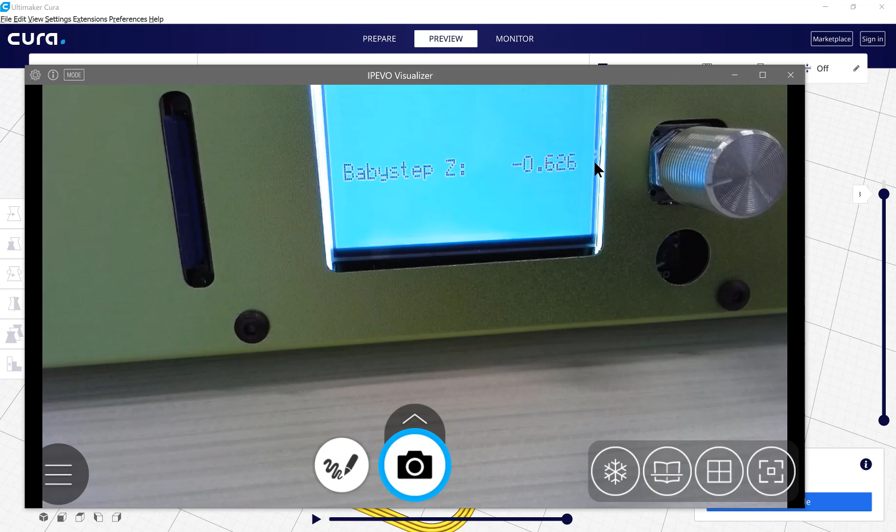What you're looking for is, if your nozzle comes out something like this, they're usually not quite that steep, but if it comes out like that, then your filament is melted and coming out in a little stream. This is the 0.4 millimeter nozzle. So what you want is for this nozzle to be squirting out filament where it's squished a little bit, kind of like that. That's more or less what I'm looking for.

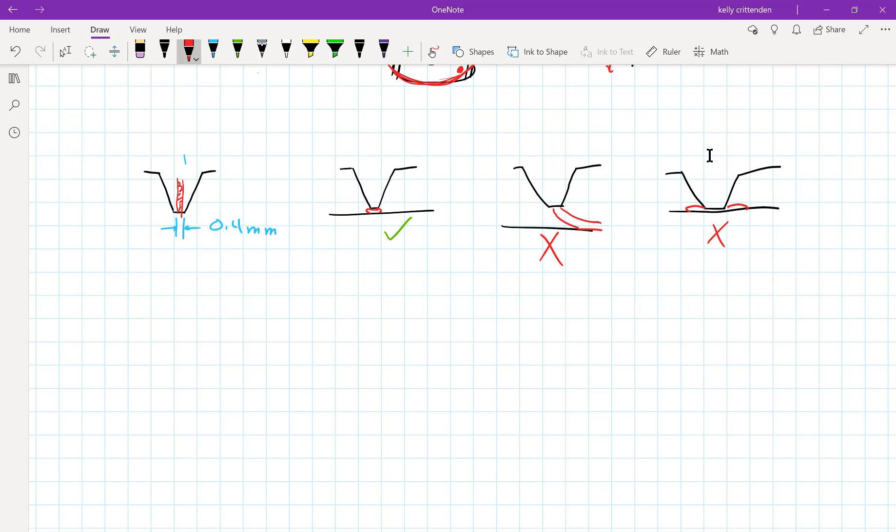I don't want something where it's just kind of laying it on the bed like that, because it won't stick. That's not good. And I don't want it so close that it's almost transparent, because if it can extrude anything, it extrudes it almost transparent. Usually when you're that close, you'll hear the clicking sound and it won't be able to extrude anything. Our little printer, I think it actually might stick this time.

It might be okay. It kind of looks like it's going to stick well enough. We'll get it off of there and see. The bottom's going to be a little messed up, but it'll be okay.

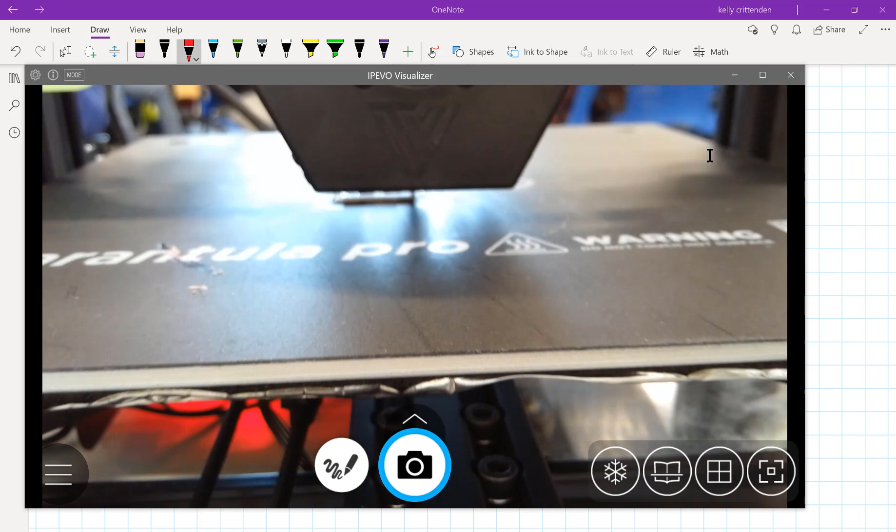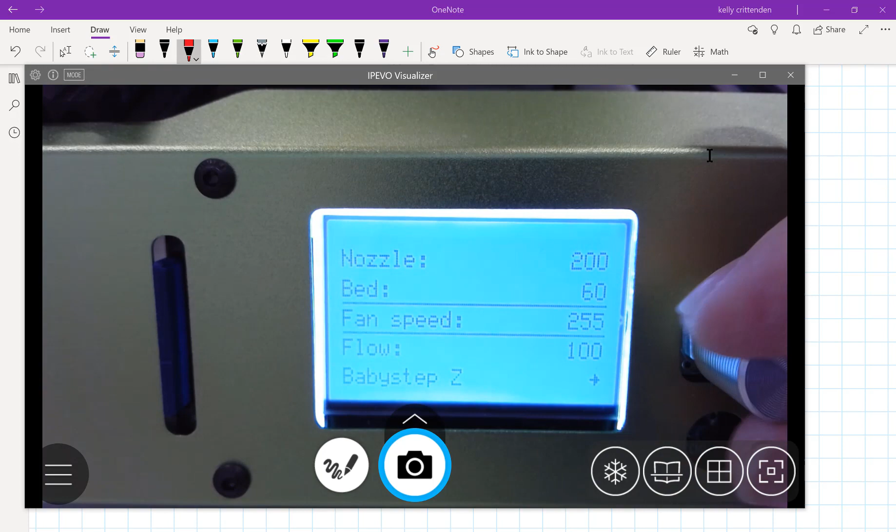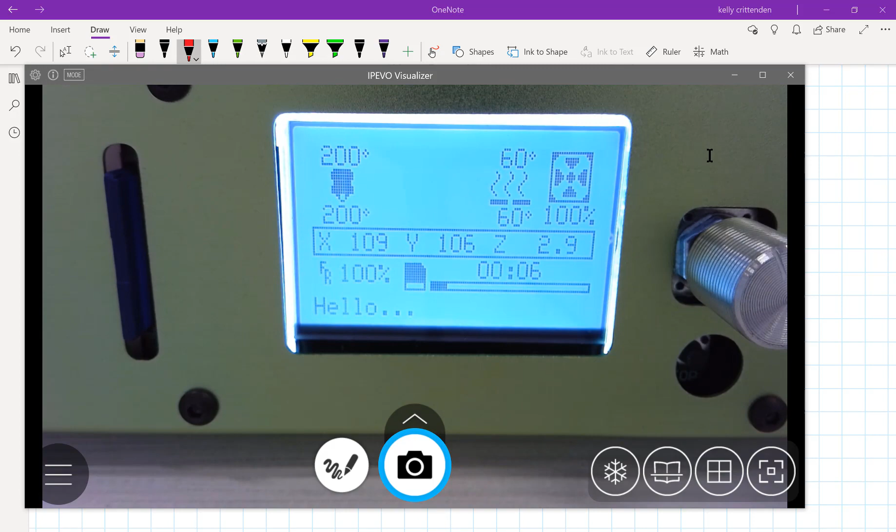On your little panel here, it told me in Cura like 17 minutes or something. If I go back to the main info screen, it tells me I've been going 6 minutes and gives me a little progress bar. Those are kind of accurate, but I wouldn't time anything based on them. They give you a rough idea of generally how long it's going to take, whether it's 30-ish minutes or 3 hours. It'll give you an idea in Cura before you even start the print. It says 18 minutes now, because I raised the infill a little bit, so it's 4 grams, a little bit more filament.

Since I don't have a spool holder, you want to make sure every now and then that this isn't getting tangled up, because it can knot up and not be able to pull filament through. And then you can let it go.

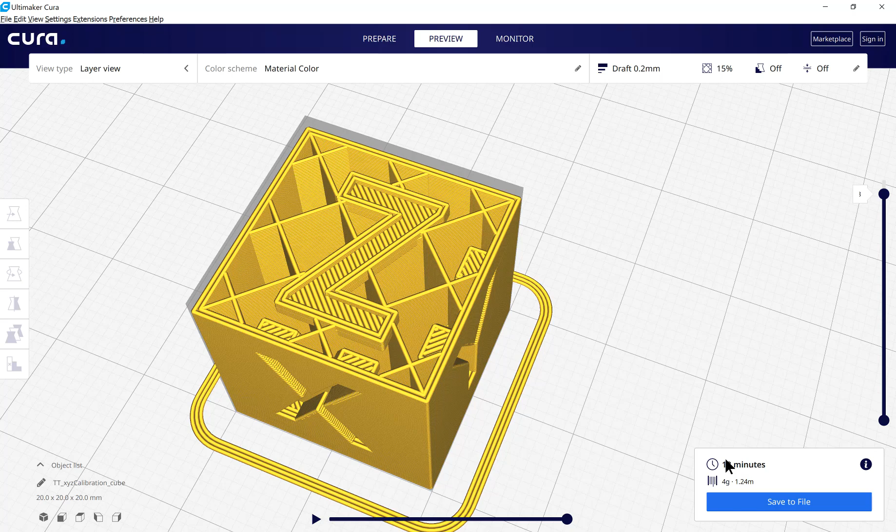The first few times I wouldn't leave it, and I wouldn't do really long prints on the first few attempts. I would just do some relatively short, maybe 20-minute prints like this, and sit there with it to make sure nothing is obviously wrong. I generally don't leave them completely alone for very long, just because you don't know what's going to happen. Commercial printers, you leave those, you put a file in there and just leave them. These, I still kind of want to make sure there's not a fire problem with them, or at least a melting problem.

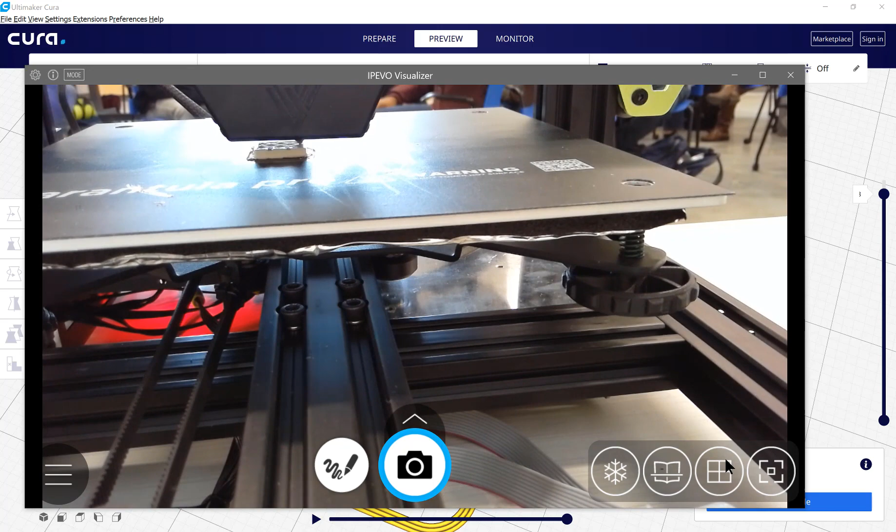So maybe we'll finish that print up, I don't know. Are there any questions about stuff right now? Assignments or anything? Yeah. Okay.

The temperature control or... Oh, okay, you're talking, yes. So...

Sometimes the TL smoother is what you're talking about, and those things are relatively cheap. I've put them on, I don't have them on this printer, but I've put them on other printers. They are little plug-in devices that go in the brain of the computer, and they will help, but they don't necessarily cure all of that stuff. But they can help, they don't hurt, and they're like $18. So I don't think that'd be the very first thing I'd add, but if I've done all the others, then that might be the thing I'd add.